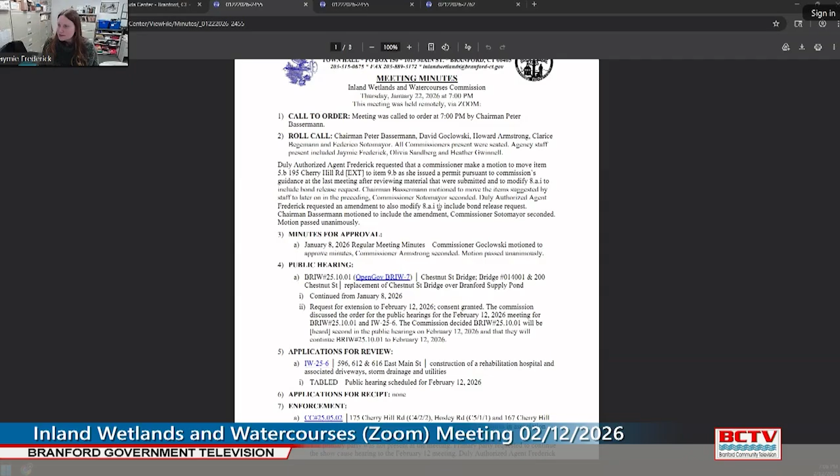Commissioner Bassermann: The minutes we're looking at are from January 22nd, and I have a copy of a memorandum dated the 22nd regarding that bond issue. So these are the filed minutes. I'm not sure if the version sent to the commissioners may have been shortened. Commissioner Goclowski: My minutes show the memorandum on the 2nd or 3rd page. Commissioner Hegemann: I didn't scroll down far enough. Okay, I see it now.

Commissioner Bassermann: Commissioner Hegemann, was there 2 parts to the issue? My other question is about amending the vote. If that's correct language, fine, but it sounded weird to me. I thought when we talked about it, it was an addendum, not an amendment. I didn't know if there was a procedure that if you vote on something in one meeting and then have something added to it, whether the same commissioners have to vote on it, or whether you just need a quorum. I just wanted to bring that up because I don't know the process.

Very good question. We can look into it and bring it back if the motion wants to be withdrawn, or if everyone's comfortable, we can look into it for the future.

Commissioner Goclowski: We can actually approve the minutes minus that particular item until we have a chance to look into it. We have a lot of stuff to go through tonight, and this is a very small item to be concerned with.

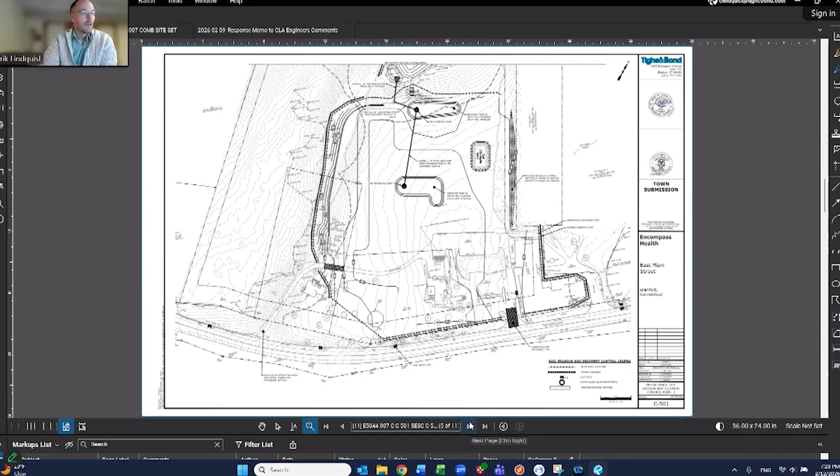There was a request from the third-party review engineer to add water bars here, which we agreed to, and those will be added in the following plan set. We would also provide locations for sediment traps to collect sediment from the flatter area we have to excavate and maintain until building starts. Those will help alleviate excess sediment from reaching the retention pond. This will be further elaborated on in the revised sets.

One comment from peer review was about how the pond would be phased and constructed. They raised good questions that we're incorporating into the plan. Essentially, we'll have two storage piles back here as part of the erosion control plan. One will be for spoils from the pond as we remove material—the lower layers pulled out to achieve the appropriate pond volume—staged in one area so they can dry and potentially be reused on site.

There will be another pile for invasive species, staged on the side to dry out before being removed from the site and taken to a landfill. We have further erosion controls back here as well. There were questions about how this area will be dewatered—there will be a series of hay bale checks coming down the hill, which will also be added to this plan.

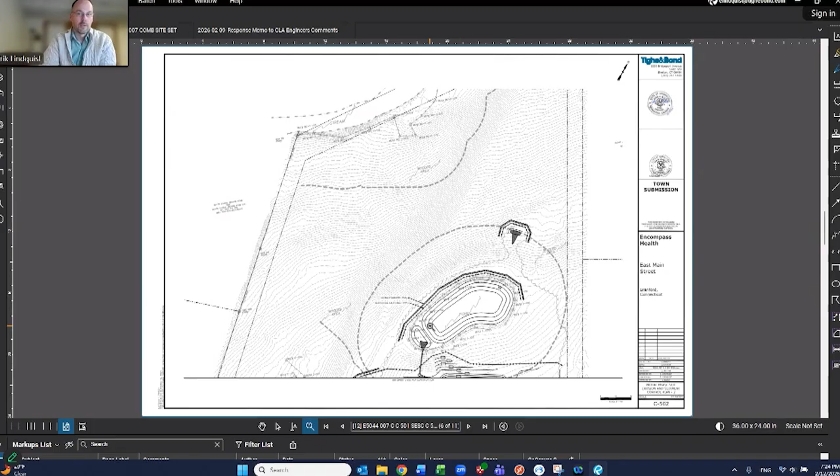The pond will be pumped out in this location. The idea is to have this work done as early as possible, with the pond stabilized before we start discharging flow from the site into it, so that it's functioning and operating at the effectiveness we're looking for.

Moving forward, these are the details for the erosion control—we don't need to go through all of these. This is more detailing showing a section through the pond in both directions to illustrate what's being done. The existing pond is arbitrarily shown here; we don't have the bottom of the pond yet, so it's just sketched in with a dash, but it could go a bit deeper than shown. This is also a bit exaggerated to emphasize what's going on there.

So it's not as big an excavation as it appears here based on the exaggerated scaling.

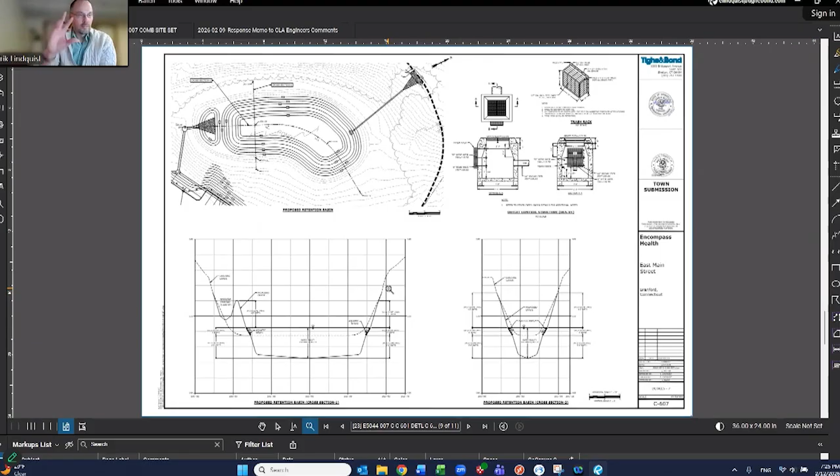As I go forward, this is the planting plan. As you can see, it's a very robust planting plan. The red trees are the ones out in front that will be removed as part of the sightline requirements to meet the state requirements for visibility of the roadways and driveways.

But there'll be a series of perimeter plantings, baseline foundation plantings around the building. The area where we're demoing the building will be grass mostly with some trees to help provide a nice buffer. There'll be various landscape buffers along the property lines to the neighbors. We're trying to maintain the tree lines on all the other sides and provide some plantings at the base of the wall.

We're going to probably beef up the plantings in close proximity to the wetlands. That was another comment that came from the third-party review, as well as the town review, about the proximity of the wetlands and just trying to do things to help protect that close range of construction activities.

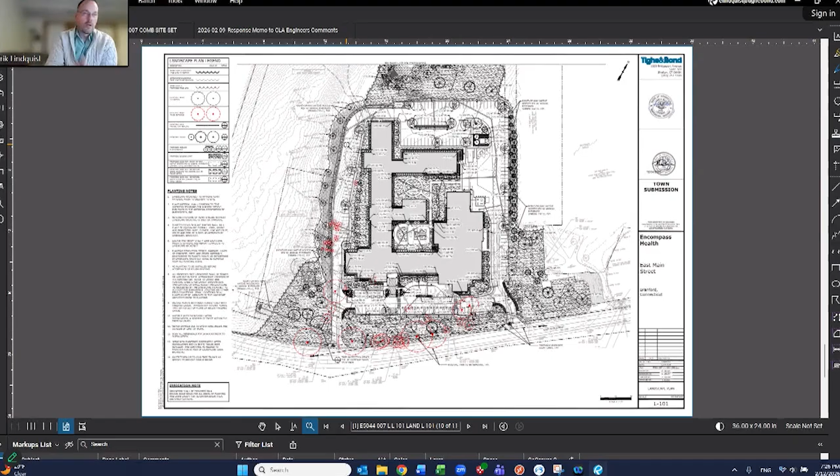But there will be a retaining wall here, which will help protect against any degradation to the wetlands, because retaining walls are excellent for preventing erosion down the hillsides. They kind of act as a barrier wall. So the placement of this wall is actually in a great location for helping prevent and protect that wetlands.

As noted before, there will be a series of wetland plantings and enhancements to the wetland to make this a more functioning and aesthetic wetland. Those are shown here, and those have also been reviewed by the third-party engineer. So that's essentially the layout of the site and what we're proposing out here.

I'd be more than happy to answer any questions or go through the memo from CLA Engineers. But I'm more than happy to pass it along to you, John, if you want to take it from there.

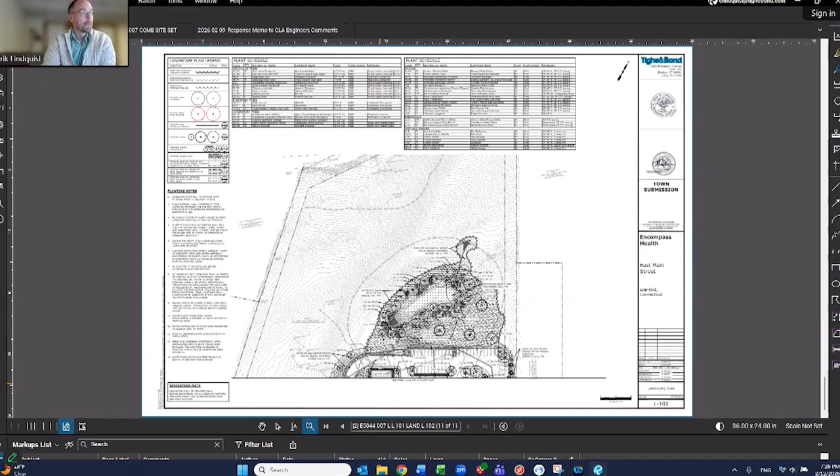Thanks, Erik. So I think we're doing pretty well, Mr. Chairman, we're only at 7:27. So if you want to go to commission questions or the peer review, then we can continue on. Yeah, I guess it would make sense, since some of the peer review items have been addressed by Mr. Lindquist's comments, maybe we go to the peer review, and then the commission can have both of the material that was reviewed to comment on.

So why don't we turn to the peer review folk and see what their comments are at this point.

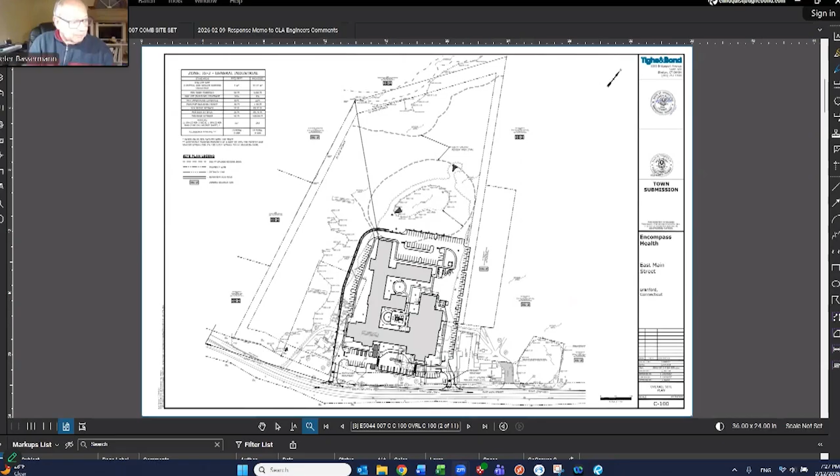Sure, I can start off. Kyle Hobbert from CLA Engineers. We're located... can you turn up your volume a little bit? Oh, sure.

How is that? Better. Oh yeah, good. Okay, good. Again, Kyle Hobbert from CLA Engineers, located at 317 Main Street in Norwich. I'm a professional engineer with the company. I did the engineering review for this project for the third-party review. And with me tonight is Bob Russo from our office. He's a certified soil scientist, and he reviewed those aspects of the project.

Bob and I both walked the site on January 23rd, prior to the heavy snowfall, thankfully. And we also reviewed all of the application documents, the plans and the reports that were submitted as part of the application. It was a very thorough set of documents and reports and plans that were provided.

We then went through the documents and provided a series of about 26 comments to the plans and to the reports. We have subsequently met remotely with the applicant's team, and they had provided a response letter noting how they would plan to address the comments in our letter. I think their plan to address the comments from our letter is appropriate, and when incorporated into a plan set, would be in good shape.

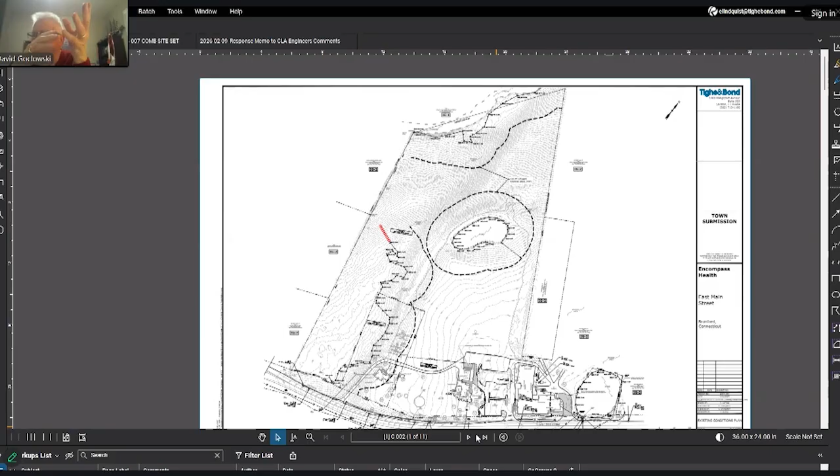This is Commissioner Goclowski, and I'm not sure who can answer this question. You're going to enhance the current man-made pond, is that correct? Correct. And are you making it deeper, or are you making it wider or bigger? You're not making it wider or bigger, you're just enhancing what is currently already there.

Yes, what we're doing for the pond is the limits of the grading. So this is the berm of the pond, and if I zoom in it's a little clearer. This right here is essentially where the wetland line is, essentially the berm of the pond. This is where it's flat and you can walk around it for maintenance, and this is the grassed area as you walk out the site. None of that from the berm in is where this work is being done.

Essentially we're going to be carving out this pond to provide the DOT, or DEEP required wet pond parameters. You need 1-on-3 slopes with a 1-on-6 vegetated shelf at the water surface line, and then it goes 1-on-3 again. In order to meet those requirements laid out in the stormwater quality manual, that's what the grading has been done. That results in, you also have to have about a 4.5-foot standing water surface elevation, which discourages things like phragmites. So it needs a certain depth. All those parameters are what have kind of built this, as well as the water quality volume.

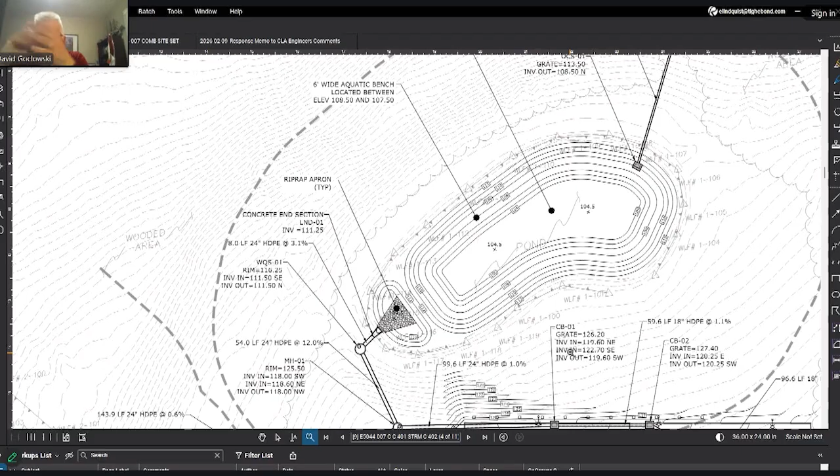At the end of the day, there will be a little extra excavation out of the bottom of the pond likely. I don't know the exact bottom depth of the pond, we didn't go out there with a pole and measure it, but my expectation is that it will be cutting out a couple of feet. That will take it down a little deeper, but the perimeter of the pond, none of that will change. It's simply reshaping the interior of the pond. So the point is you're trying to make the pond better than it currently is. Correct. Okay, thank you.

This is Commissioner Bassermann. What's the source of the water currently in the pond? Is it stormwater and groundwater, what supplies the pond today? The primary source, and I could share this, I didn't show this before, but this is the watershed for the area, the existing watershed. You can see EXWS1B is the area that drains to the pond currently, so that is the primary source of water. There may be some groundwater overland flow that comes because this is a naturally occurring hill, and I could let Matt speak further on this if you'd like. But basically those are the two potential sources of water, the primary source being this overland flow to the pond.

One of our concerns, which we laid out in our alternatives analysis, is that in the proposed condition, the watershed for this pond now is significantly smaller. That's one of the reasons it also behooves us to maintain water flow to it, because this development does cut into that watershed area significantly.

And a different question for Commissioner Bassermann - I believe you said there was no hydrological connection from that pond to anywhere. Is that also true of wetland number 3 and the pond there? It's self-contained. It doesn't go anywhere.

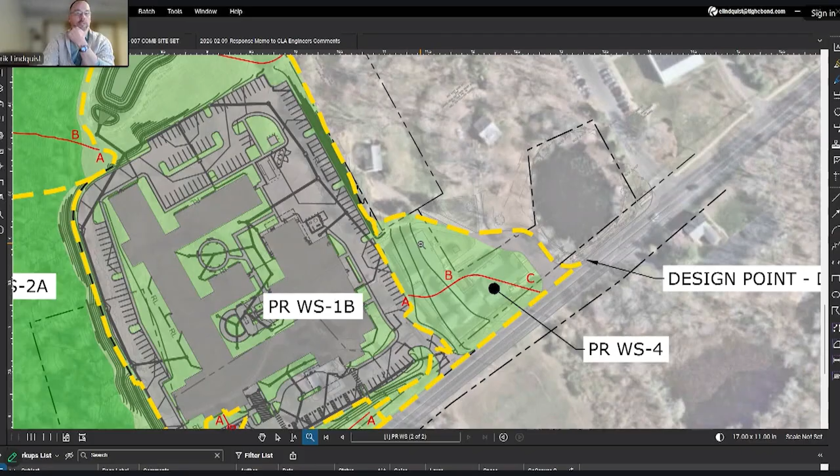So from the wetlands, you're going to have an existing roadway to remain as driveway - that's your immediate connection that won't be touched. Everything to the southwest of that will be demolished and enhanced by plantings and grass and things of that nature. Thank you. And that red line, BC - I couldn't read the legend.

That's a time of concentration path. Essentially, it's the hydrologically furthest point away. When measuring flows for a watershed, you need to understand how long it takes for a drop of water that lands at the hydrologically most remote point to make its way through - that's how you calculate flow for a watershed. So that's just showing the longest path of water that falls in that watershed, and that's how we determine flows.

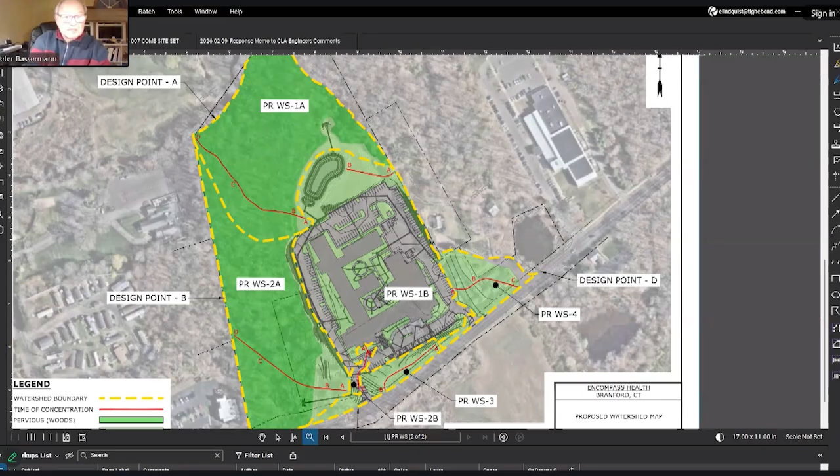Thank you. I guess at this point, it's commission time.

This is Commissioner Hegemann, I had two questions. There was mention of a 4-foot high metal fence with vinyl mesh. Is that a temporary fence around the pond, the big pond in the back?

No, that was a request, and it's something we typically show. You should have a safety fence around a pond so children don't come up to it, or anyone goes into it or trips into it - it's a hazard, so fences are added for that. One way to address that is we chose a black vinyl mesh chain link fence that's 4 feet tall. I personally prefer black vinyl because from a distance you don't even see it - it blends into the background. I think those are aesthetically the best looking, but people have used split rail fences which I don't think work as well for safety, even though they're more natural looking. I don't think they provide the safety measure they're intended to provide, so I don't prefer recommending them.

Commissioner Hegemann asked, so does that change the value of the wetland? Because it's going to be a barrier to critters that crawl to go to that area?

Matt, I could let you speak on that in terms of chain link fence. It depends on if the chain link fence will be wildlife friendly. Sometimes these types of fences meant to keep humans out can have a gap in the bottom that would let certain species pass through. So if that's something the commission requests, Erik, you could speak to whether that could be included in the design.

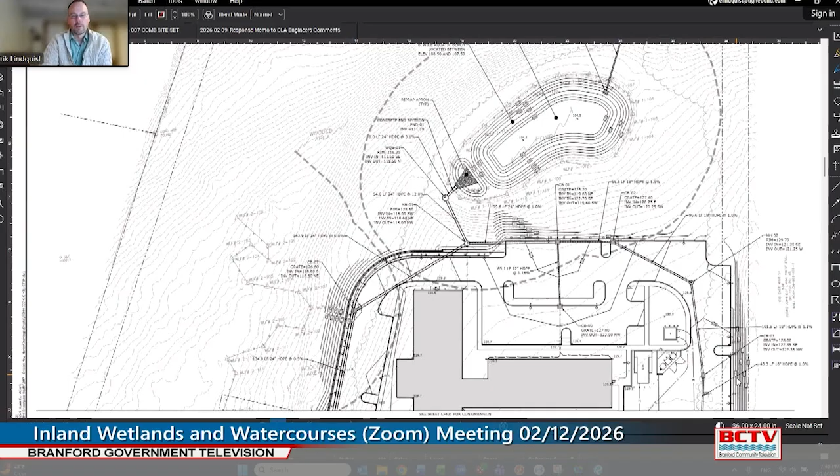Thank you. This is Commissioner Bassermann. What's the, I guess, construction time from shoveling the ground to occupancy?

I wish I was better with numbers and timeframes, I don't recall off the top of my head. I believe it's about a 12-month or a 15-month construction schedule, if I'm not mistaken. John, if you have it handy, that'd be great, but I don't have it in front of me, though I can get that number for you.

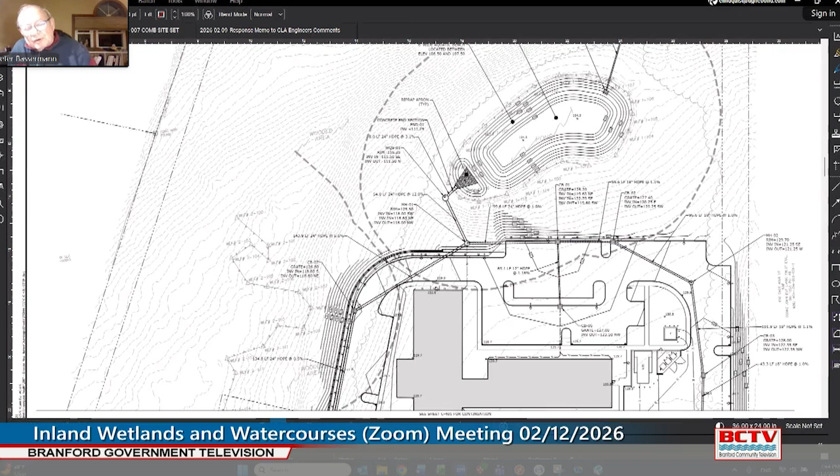I guess the concern is, as the site progresses, the stormwater management controls - how are we protecting the site as it goes through its various phases of construction if the management controls that are put in at its inception aren't the right ones as the construction progresses?

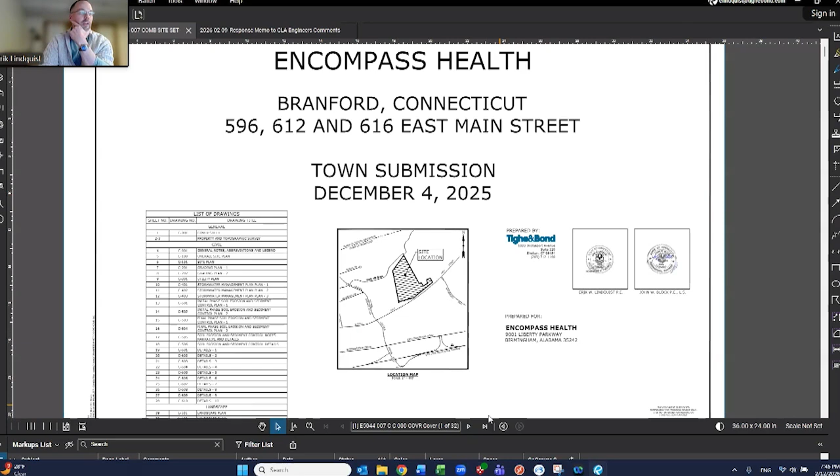Well, we do have a phased erosion control plan. I'll share the full set of drawings I have, and I can go through this really quickly. There's a construction sequence included in there, so we can never capture every possible scenario of stages of construction or what have you out there.

As I go through this, I showed you before the initial phase. This is even further along than probably a really initial phase where they'd set up a staging area and start to do some earthwork in this area. But basically this is the initial phase, and then there's also a final phase plan, which shows a more end-stage scenario where we're still having the erosion control perimeter set up, the wall's been built, there's inlet protection and things of that nature.

There are notes included as well calling for the contractor to amend things as needed. There'll be inspections done throughout the process as part of the Connecticut General Permit process. So as things are seen in the field, there'll be repairs requested, edits requested, just making sure everything's maintained and protected throughout the entire construction sequence.

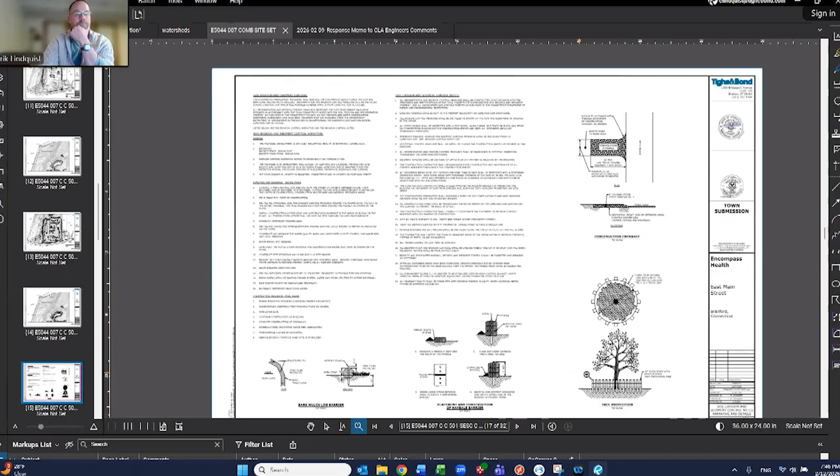Commissioner Bessermann: I thought when you made your comments regarding the pond that the work on the existing pond, Wetland 1, would be done in its early stage. Correct, that's the intent, to have this done initially, before we start discharging flow to it. We're going to want to do this correction, get the plantings in, stabilize the slope, and have this outlet control in place. That's one of the first things we want done initially, and then more significant earthwork and storm drainage could be done afterwards and start discharging to the pond.

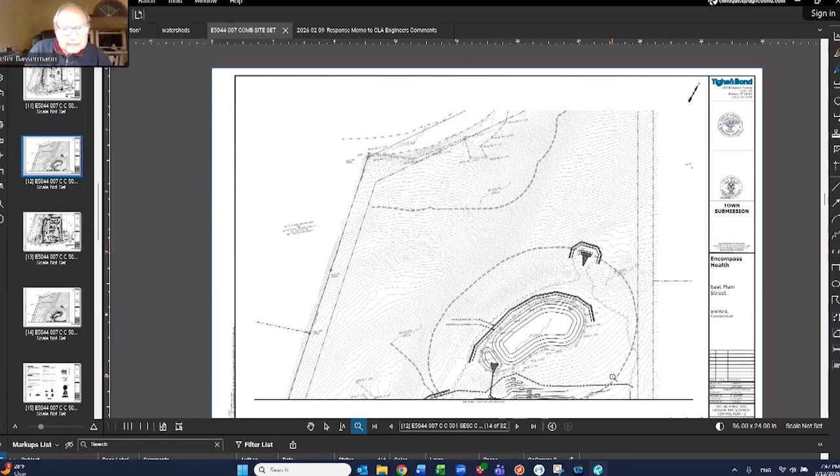And do you have a handy memory on what the construction sequence designation is on your plans? I'm not sure I understand the question. The sheet number for the construction sequence. Right here, it's C505. Thank you.

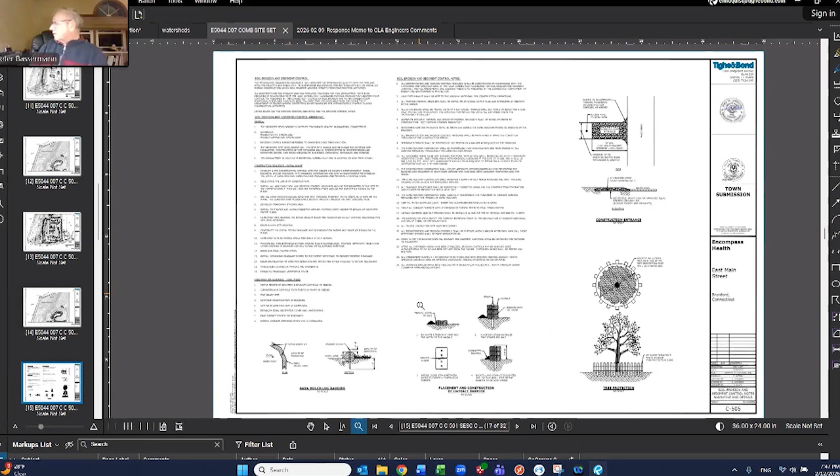Commissioner Bolla: Earlier, Mr. Lindquist, you had mentioned the sediment traps in the section closer to Route 1. Can you go back and review, is there multiple on site? Where's that sediment getting trapped before going to the pond?

The idea of the sediment trap is when you have large areas of clearing, especially when excavated for a foundation, you'll have a lot of exposed earth that's not stabilized, no grasses on it. During construction, the mud will get moved around. So once you get a certain size area, about an acre to a half acre, you want to look at sediment traps and basins to provide places for the water to go and settle out sediment. That's what these basins are designed for.

Essentially, in this area, this whole section is designed to go to this sediment trap right here, and then the back area will go to this other sediment trap, so that this water is clean before it goes into these pipes and out to the pond. In the revised set of plans you'll get, there's a detail for this.

There's a dewatering sump, I'll call it, essentially a riser pipe with perforations and stone around it. The dirty water comes into it, and the crushed stone as well as the filter sock around the perforated pipe will filter the water out, so clean water goes into the pipe and out to the pond. The pond itself acts as a settling area, so as the water sits there the sediment settles out, keeping that material on site so clean water goes out to the back. That's essentially what those basins are for.

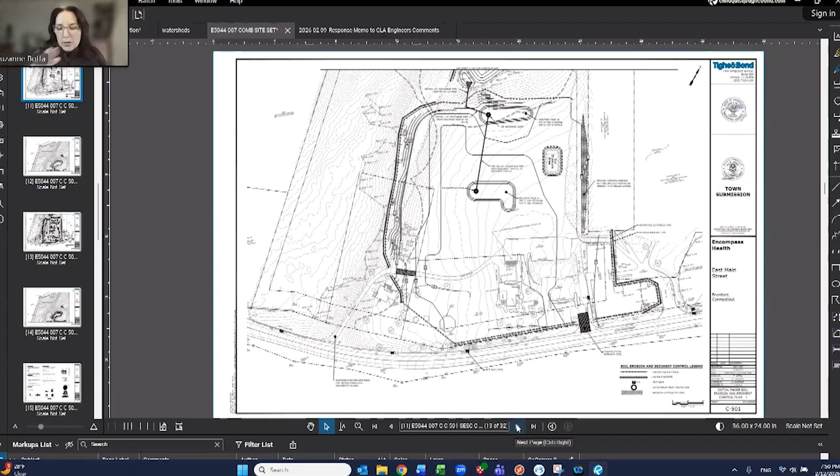Okay, thank you. And post-construction, can you walk through in a little more detail the treatment train for all of the site, including the roof runoff and any different sections of the property?

Sure. So basically the entire site, the building perimeter will have a bunch of roof leaders that come down and are collected around the building. I can zoom in and show this. It's largely going to be the roof leader lines connecting at various places in the buildings. There's area drains in the grassed areas, catch basins in the parking lot. All these things come together and they're collected. Each of these will have sumps on them, which will help add further sediment collection within the catch basins.

The pre-treatment, as discussed before, in this case over here, we have an inlet water quality structure, so this will have that pre-treatment before it discharges. This one doesn't have a pond or any retention, other than the minimal amount in this level spreader. But we've overcompensated for that in the rear pond because we don't have the ability to do it out front. So these large areas will go out to the back.

As noted before, there's a water quality structure here. That's the pre-treatment. The sediment forebay is also pre-treatment that allows sediment to come out into the pond beforehand. And then there's the water quality line within the pond, which provides a cooling factor. It provides a way for the water to settle out sediments once the site is stabilized. So this falls under the wet pond of the Connecticut DEEP water quality requirements, and the outlet control maintains that. And then once again, we have a level spreader out back.

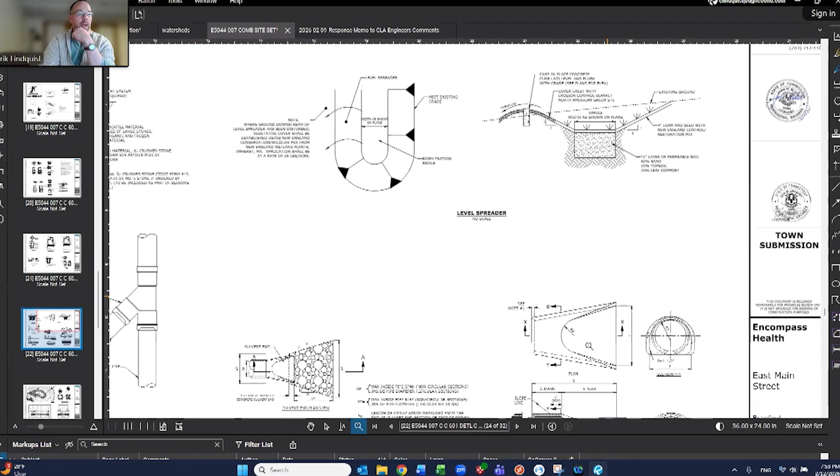Yeah, so let me show you the detail for the level spreader just to give you an idea of what that is. Basically, it doesn't show the outlet, but there'll be an outlet like this that comes out of that discharge. This, like I said, is modified riprap, so it provides energy dissipation through the rock. These are large, 12-inch stones. They'll come down the hillside, and they'll go into this area where the water will pool a little bit and build up about a foot before it goes over the level spreader, which we propose as a concrete cast-in-place curb that allows it to be laid level and flush to make sure you have an even level spread, which will go down the hill.

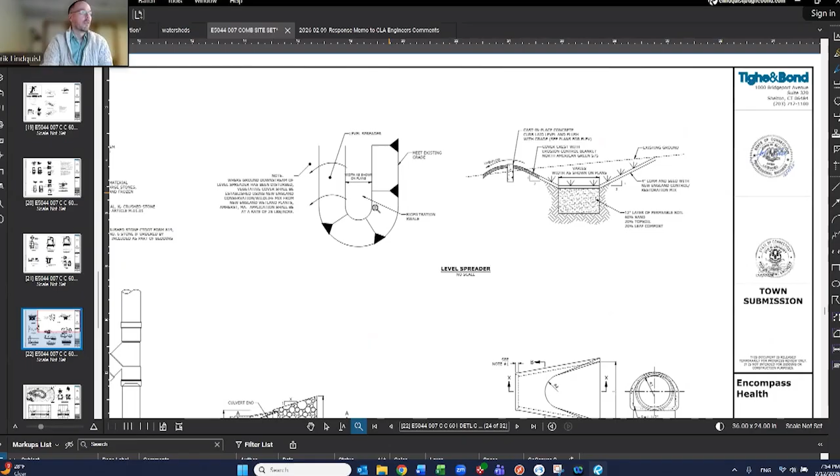And then in terms of plantings, I can go to - wrong one. We have this, and one of the things I've asked my landscape architect to do, and part of one of the comments, was to lengthen this level spreader to take up more of this area to provide that level spread. We're also going to rotate this a little better to align with the contours. And I've asked my landscape architect to look at potential decorative grasses and things of that nature that could help further enhance this discharge as well. So all three of those items will be incorporated into the next set when we resubmit.

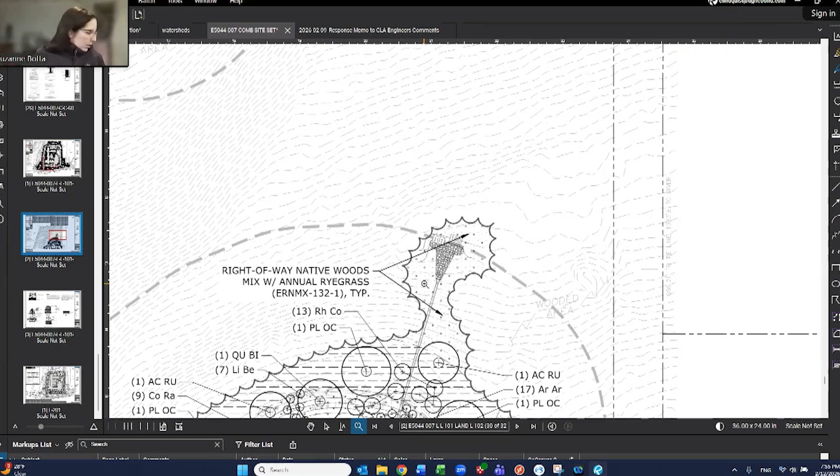This is Commissioner Bolla. Is there plans, speaking of all the snow that we've had, for snow stockpiling areas?

Yeah, so I can go back to this, might be the best plan to discuss it. So there are a few areas which we have to provide it. And maybe the grading plan might show it a little better. If I go to that set, that might be even better to show some of this.

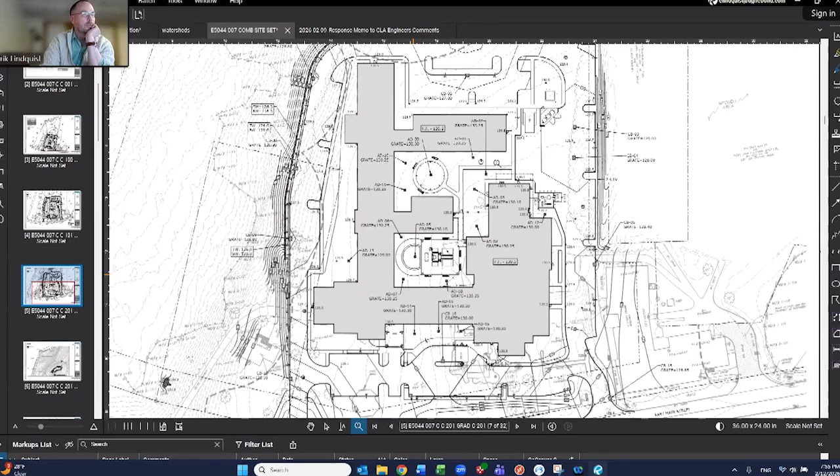So especially in this area, when we put that wall in here, it's going to get a little flatter. This area along the backside of the curb will be one area where we have like a 3 or 4 foot shelf to put snow. The entire back area here on this side will be able to have a shelf for snow as well. Along this side of the building, there's a considerable amount of grassed area that can be provided for a shelf of snow.

As well as along the frontage of the roadway in this area. We wouldn't want to put it towards the building, but along this frontage of the street, where we have a little bit of a knob here that will hide it, and not necessarily huge piles because there's not much pavement in front. But we see this being an area back here that we could put snow as well, so it's along the perimeters of the site. We wouldn't put anything on the high side of the wall over here on the wetland side, obviously. But we're trying to put it in places that make sense, where we have landscaped areas that don't have high congested plantings.

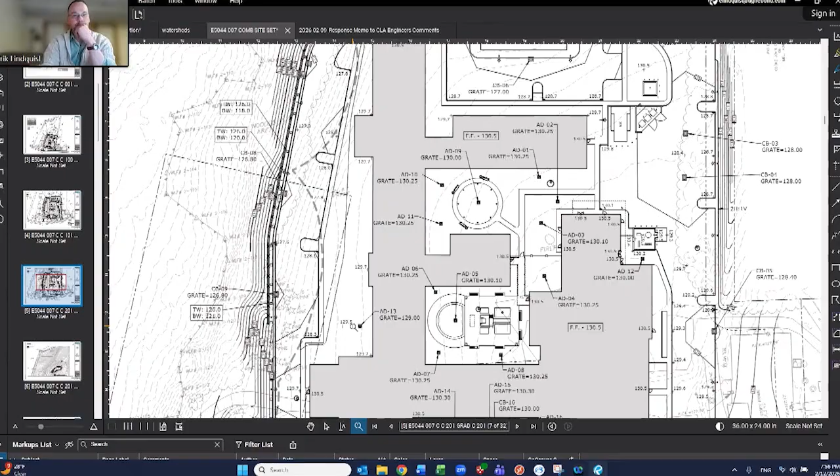Again, this is Commissioner Boda. Can you just point out where any stockpiling would be? I know you talked a little bit about pulling the material out from the pond itself, but what about the remainder of the site?

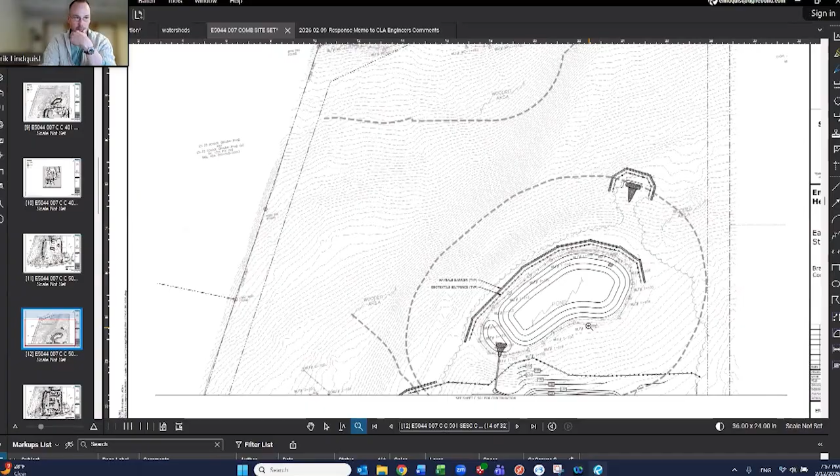Yeah, so those two stockpiles I mentioned, when we send the revised set of plans, will be located in this area, roughly right here, just in the grass area to the south of the pond. In the other phases, this is just our best guess — obviously a contractor is going to have a better understanding of where it makes sense to put these piles. I don't see a concern wherever these are located throughout this area of the site. I prefer putting them towards the back, but not so far back that it's close to the ponds or anything like that, but something centrally located, convenient to where the work's being done.

I think this is a good spot, away from the walls, but close enough that it could be utilized wherever. But if this location gets bigger or moves around, I'm not overly concerned with it — it could likely go anywhere in this whole area back here.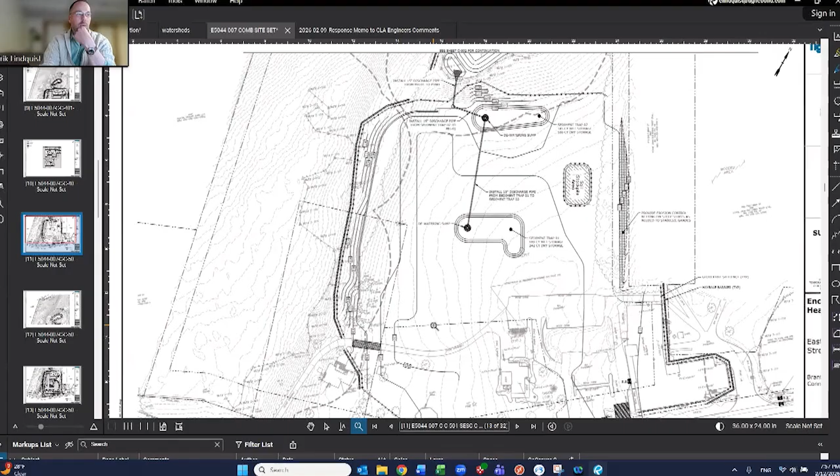Okay, and it's just the one? As of now, but if they wanted to do two, I wouldn't want to put a restriction on that per se, because I don't know how much material is going to be generated at any one time and how they're going to place it when they put the walls in. That's really a means and methods issue for the contractor, but this is just a general guide to give them instruction on what we think would be a wise way to do it.

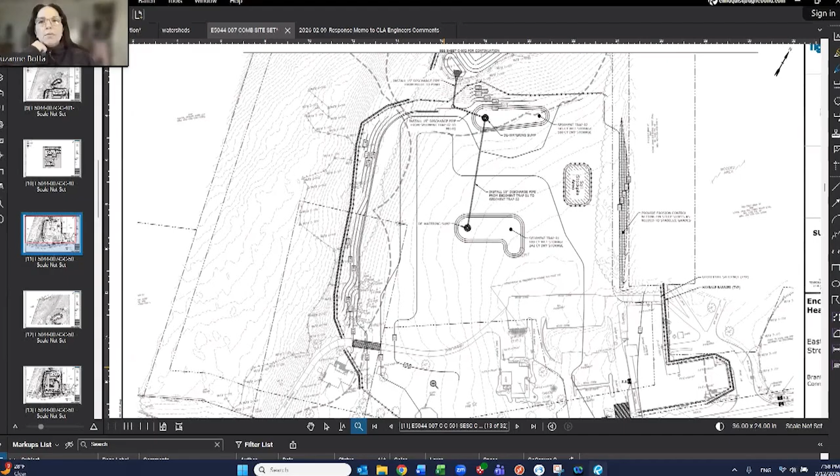Amy Frederick, the Wetland Agent. I do have a follow-up question off of that. In regards to the fact that there's some redevelopment, the asphalt material on site — will that be stored on site for reuse, or is that intended to be taken off site, or is it not known at this time?

You're talking about the existing parking lots? Yeah, I'm not sure what would be done with that material. I'm guessing it will be hauled off. I'm not sure if there's any way of mixing that with native material on site and using it as general fill. There's not a lot of it, so I'm guessing it would be removed, but I don't have a definitive answer on that at this point.

That might be something the commission would look for clarity on.

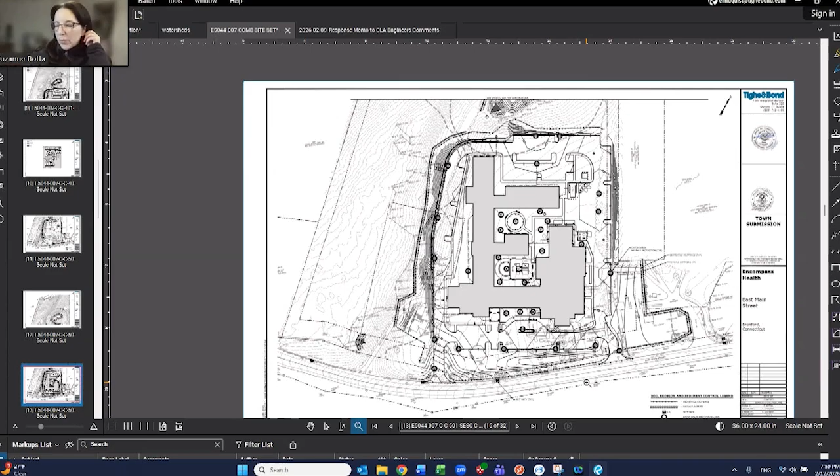Yeah, this is Commissioner Bolla. I would second that, and I would just be concerned about any of that being placed on the...

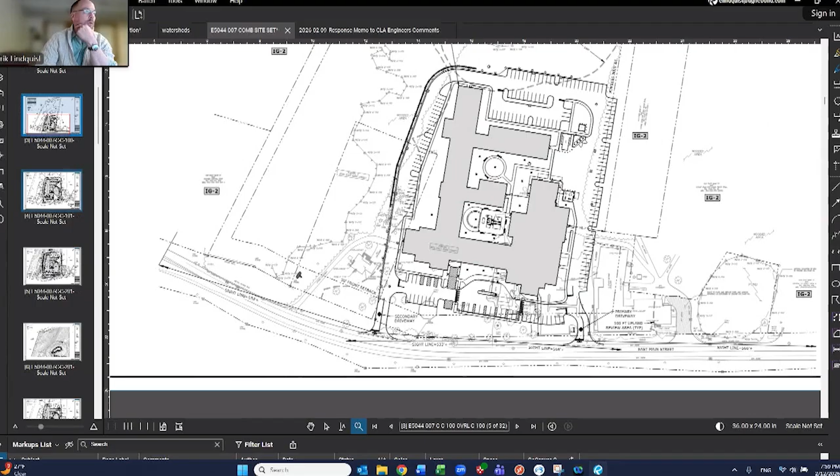On the western side near Wetland 2, that material definitely wouldn't be used here because this needs to be a certain select fill material for the retaining wall behind the wall, so that would not be used in that area. My guess is it would be removed from the site. If I'm not mistaken, this isn't really the greatest material, there's not a lot of it, and it's probably pretty thin as well. I wouldn't imagine it's like a 4-foot pavement section or anything like that. My guess is they probably stockpile it and then remove it from the site.

Commissioner Godowski, predominantly the driveway, it's gravel at this time, isn't it? Yeah, I think there's a mix of gravel and pavement, correct? Okay, but most of the pavement is on the side. I got to get my bearings right, on where the original Hilltop building was - that's where most of the pavement is. I think it's in this area as well, if I'm not mistaken. I don't recall off the top of my head, but I believe this parking lot here is, and this might be gravel in the back. Yeah, I believe it's all gravel back there.

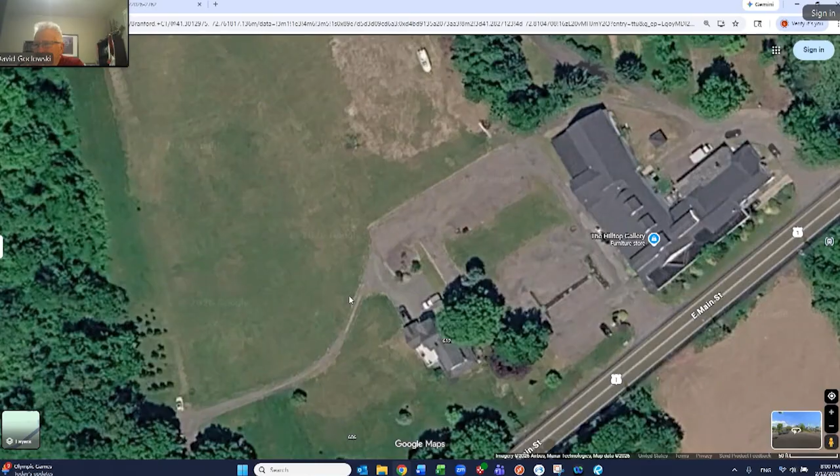This is Commissioner Begemann. I just remember that when we did the site walk, walking up the driveway, I don't remember seeing any pavement. The only pavement I remember is closer to where the actual Hilltop Gallery building was, and that area there was pavement. I don't remember the other part of the driveway having any additional pavement around the houses themselves. Right, I think you're correct.

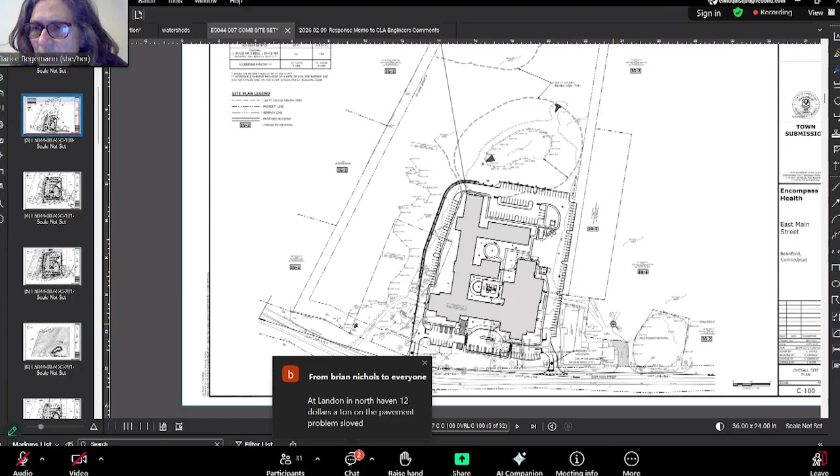Commissioner Begemann, this is a different topic. Do we know if there are any underground oil or gasoline tanks on the old property? And kind of new for me - when there's a big demolition happening, what goes into checking the land for toxic substances? I believe there was already a phase 1 done. It wasn't done by us, but I can track it down. I believe there was a phase 1 already done for the site, and those things were identified. I don't think there's anything of concern on site related to that, to my understanding.

Thank you. Mr. Basserman, when you send in the revised plans, is it possible to have a sheet or a section of a sheet that would list the various inspection timeframes? Not so much the clock time, but after what activities would there be an inspection?

That's in the engineering report, and it's part of the maintenance plan, so it's not spread amongst the various sheets - it's on one sheet, in the report. There'll be an actual maintenance plan, and that maintenance plan will be included with our general permit, kept at the construction trailer for the contractor. He has to maintain it on site during construction. Basically it lays out the post-construction maintenance plan, but there's also maintenance during construction as well. So that would all be part of the contract documents for what's being done out there.

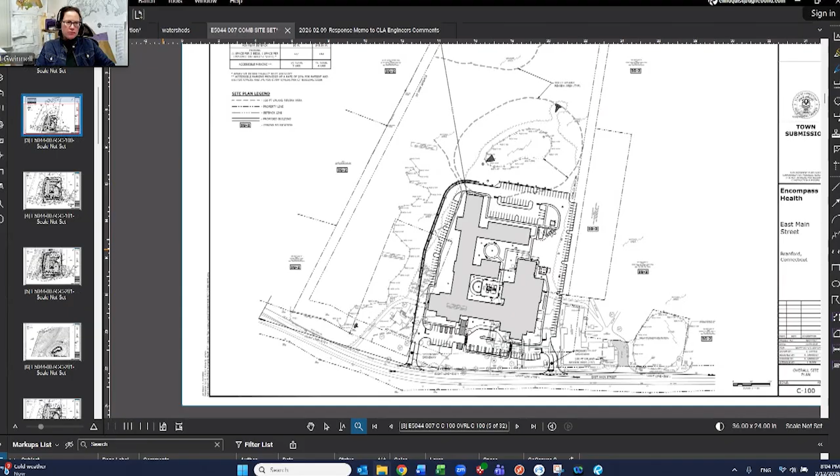This is Heather Gwinnell, Wetlands Officer. Commissioner Basserman, are you asking about at what stage in the construction process, or are you talking about a list of the items that get checked at each inspection?

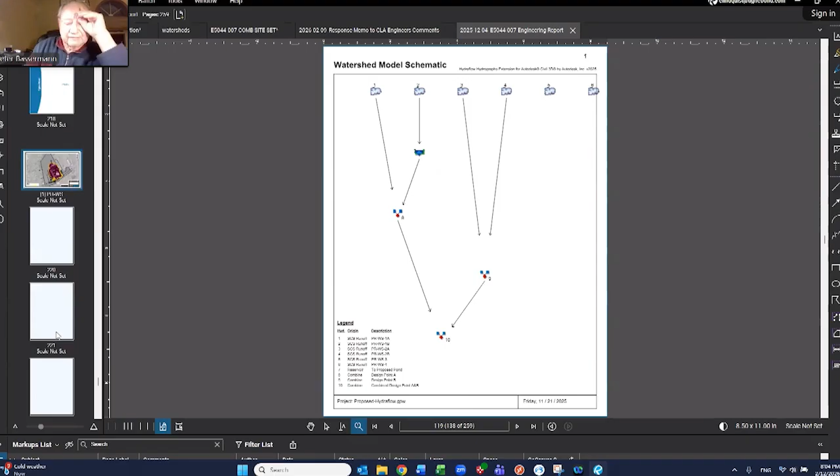I know that obviously as the different activities occur, there's an opportunity for inspections to make sure that there isn't anything that as a result of the construction gives us concern. So if there were identifying activities that said, once we've completed the wall...

All right, oh, you're talking about that. Okay, yeah, all right. This is post development maintenance here, so this isn't what you're talking about, but there, as part of the general permit, we haven't done a SWPPP for this site yet - that's why this is so important.

When I talked about the SWPPP having a maintenance plan, there's actually a DOT or DEP protocol of things we have to have on site, like checking where petroleum is stored and things like that. That's what the general permit is for, because it's for construction and dewatering wastewaters from construction activities. The whole point is to make sure things are being protected properly. It tells you after a rain event of such and such intensity, you have to go out and inspect the site. It lays out all those things, and the contractor is required to follow the general permit, which is made part of the contract documents. So they'll know they have to be out there after every rain event checking all their erosion control measures, and they'll have a third-party inspector come make sure they're operating properly. So all that is part of the general permit.

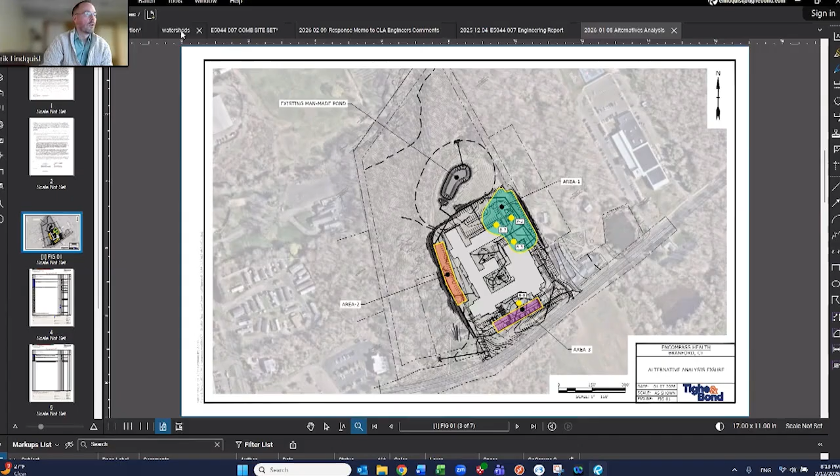I showed the watersheds before, where we're trying to maintain the same drainage patterns for existing and proposed conditions. You can see there's a discharge that goes out to the river, an existing discharge that comes out here and ultimately reaches the river. There's also a watershed that goes out to Route 1. For all these locations and watersheds, our engineering report documents that in each storm event from the 2-year to the 100-year, we're matching peak flows. But there is a slight increase in volume from the pond due to the fact it's not infiltrating groundwater.

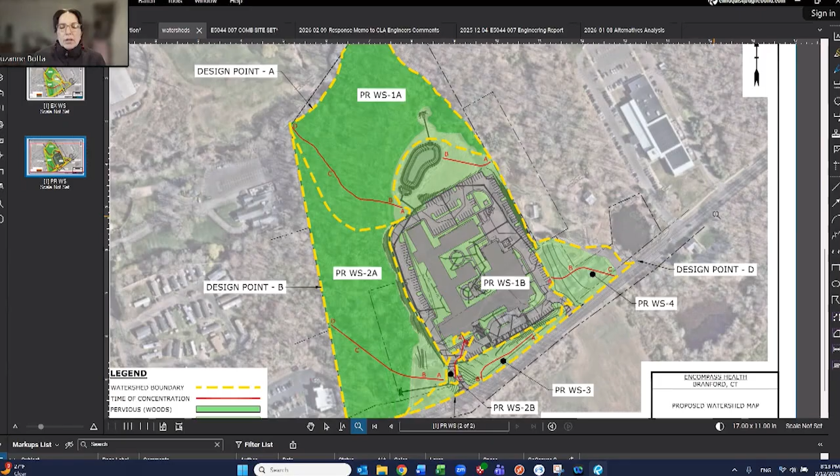Mr. Lindquist, this is Commissioner Bolla. While we're looking at this watershed image, I can't see the bottom of the key at the moment, and I was a little confused about why. So if I look at this, watershed 1B, and then where you have the discharge with the level spreader - this up here - it looks like that is still in that lower watershed as opposed to being in what looks like watershed 1A. I'm confused because it looks like everything the level spreader is downhill, so my brain can't make sense of this image.

No, I've been doing this for 20 something years, so it's second nature to me. Trust me, I get it, these things can get confusing. So everything in 1B is what's going to the pond. This yellow line shows all the area from the building, the parking areas, everything going to the pond. The level spreader is what's, essentially once it goes to the pond, it then goes to 1A. So that's why it's 1A and 1B - they're essentially watershed 1, we're just showing what goes to the pond and what goes to the river. The coloration is just ground cover - gray is impervious pavements, light green is grasses, dark green is woods. That makes more sense.

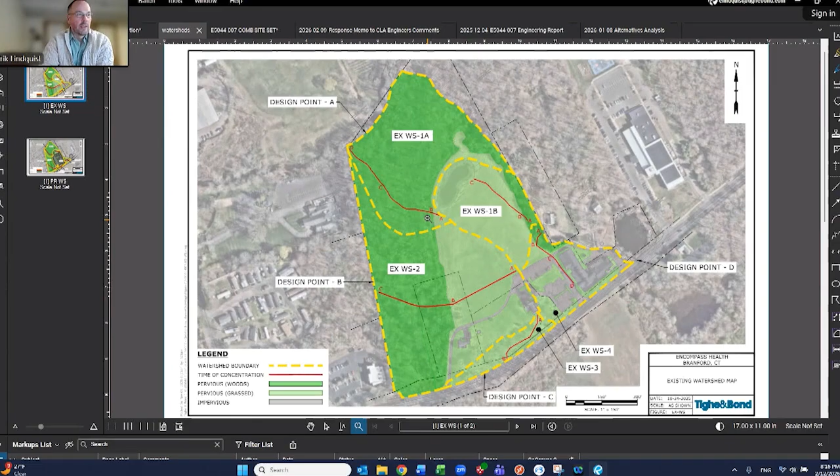You can see the area going to the pond currently isn't that significant - it's this area here, 1B. In the proposed, we're taking some of watershed 2, a little bit of 1A, some of watershed 4, some of watershed 3. So a lot more area is going to the pond now. There'll be an increase in the amount of area going to the pond.

So that's why we have the outlet control structure in there to mitigate the flows. We provided more storage to account for the greater volume going to the pond. If we weren't to use this pond, the watershed going to it would only be essentially this area here, and it would be very small - not enough flow to maintain that pond. The pond would eventually dry up because we're cutting off any potential groundwater, which is minimal anyway, since it's largely based on sheet flow, overland flow. So it makes a lot of sense to maintain what we're doing to the pond, provide clean water with the water quality structures and pre-treatment, and have a sustained flow that will support the plant life we want to put into the pond. Okay, thank you very much.

This is Commissioner Papantonis. I have a question about the woods - are they going to be staying woods? There's no plan to turn that into grass or anything. Our goal is to maintain everything out there as much as possible. We like the woods, we like the screening, we like the protection. There will be some woods cleared right here, just because we need it for the footprint of the building. There'll be some clearing out front for sight lines, and some clearing along the side of the property line for parking. But all these dark green areas are woods that are remaining, and we want to keep it that way.

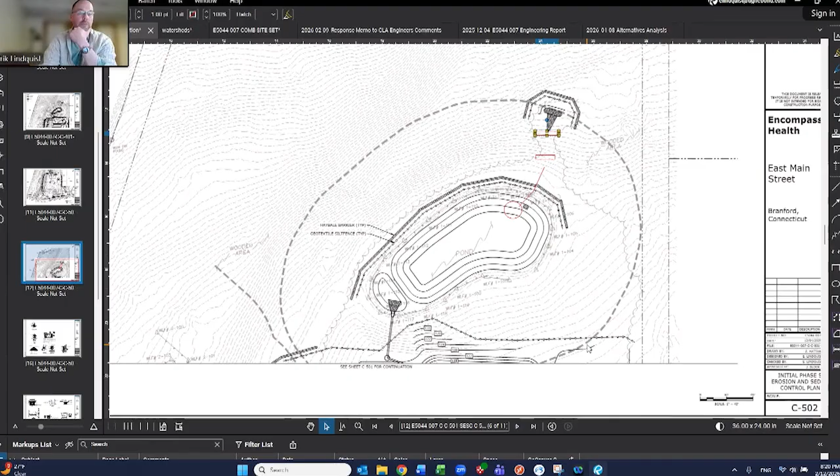And that was discussed with the third-party review engineer, and that was their advice, or part of the discussion and collaboration we had with them and their concerns in their letter that we addressed. Thank you.

This is Commissioner Bolla for Mr. Regan. Can you talk a little bit about the level spreader, and about the downhill soils? Do you know what kind of soil is there, its composition, how sturdy it is? I haven't done an in-depth soil analysis or geotechnical analysis for where the level spreader is, if that's what you're asking me. I would assume that the soils at the location of the level spreader are suitable for that.

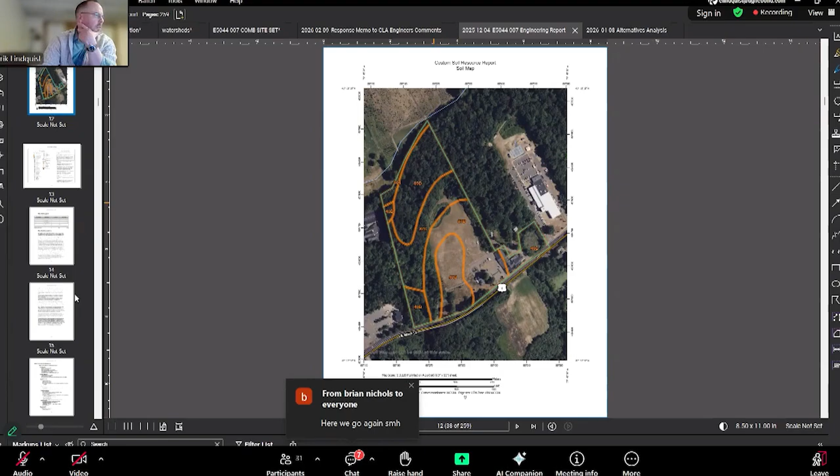Eric, if you could speak to that in regards to the load on the soils. Yeah, so this is just an overall soils map of the area, and it's 87C, so we're talking about a loam on a steeper slope. It's a soil on a steeper slope that's in good shape, not just eroding down the hillside currently. So I don't see any concern with this loamy material being used for a level spreader, especially with the checks we're providing and the controls and detail I showed you of that level spreader. We didn't go out there and do any sampling of the soils, but it appears to be a suitable material on a slope that's not eroding, with no concerns currently.

This is Commissioner Bolla. I think that even on the site walk, that was something that caught my attention. We do have some sections of town, not super far, where the soils are highly mobile. The purpose of the level spreader is to slow the velocity, and the idea of putting additional plantings beyond that is to prevent any initial creation of rills, etc. I think we've seen some pretty significant damage from small amounts of concentrated water.

So if you would, Mr. Regan, just take a look at that soil and let us know a little bit more about it, that would be really helpful.

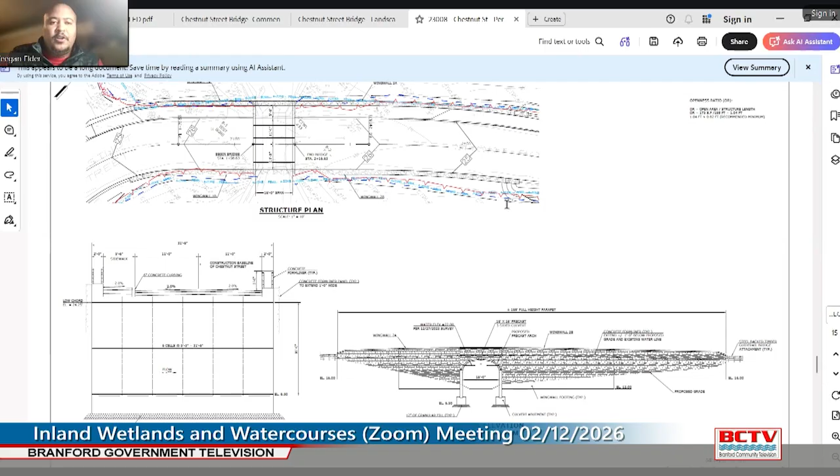Go ahead, Mr. Keegan. Okay, thank you. So this project involves replacing the existing failing structure over Chestnut Street between the Branford supply ponds. On your screen is an overview of the bridge that is going to replace the structure that's there. Roughly a 16-foot span structure, which is wider than the existing structure, creating more watercourse and more habitat in the channel.

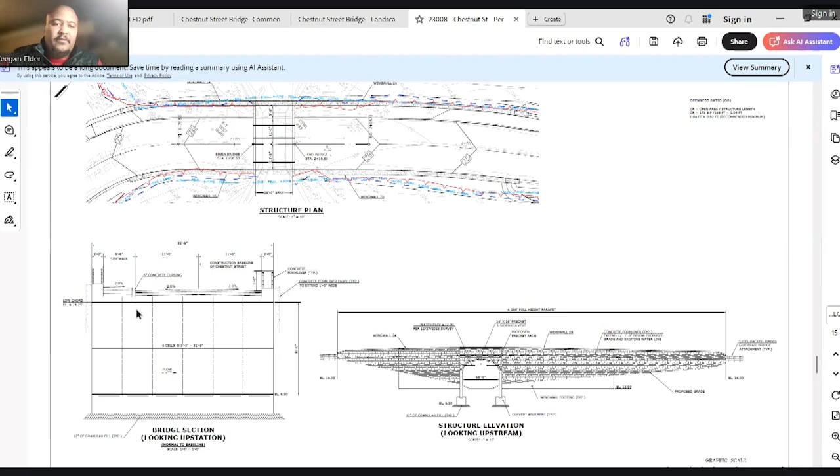In conjunction with the bridge work, there'll be a concrete sidewalk installed on the northerly side of the road, and along both northerly and southerly sides of the road, retaining walls to maintain the roadway safely in that area as well. The road will consist of bituminous concrete pavement. We have concrete parapets and the culvert that the water is going to convey through.

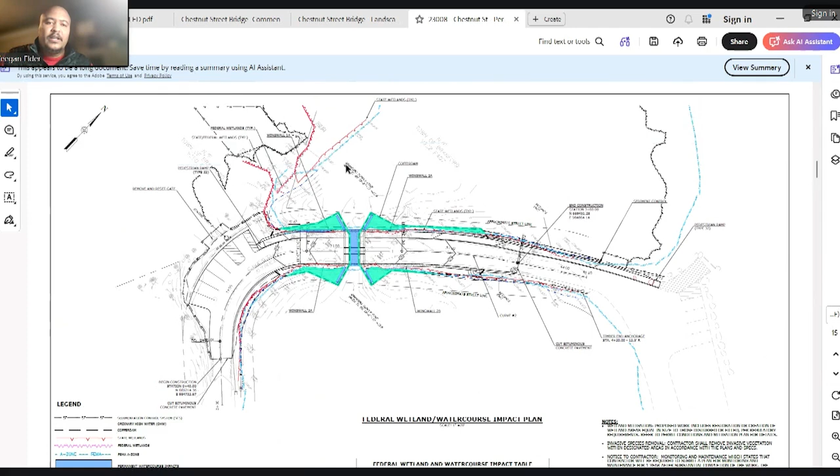For the work and the sequence of the work, we intend to close the road to construction. As part of the bridge work, there will be some roadway reconstruction approaching the bridge from the west and from the east, reconstruction of the driveways. To perform the work, we'll be installing temporary cofferdams and turbidity control curtains to protect the construction area and make sure that we maintain flow and clean flow throughout the project.

This project has been submitted to the DOT and DEEP for their review. Fisheries, NDDB, and Army Corps and DEEP have chimed in. The next step in this process, after local approval, is to submit our final permit to the Army Corps before moving forward to construction. So back to the sequence of work.

Once we get out to the site, the road will be closed to traffic. Construction is anticipated to take roughly 8 months of working time. Given our sort of delayed schedule in getting started this spring, there's a potential that it could start in the summer and go into next summer with some winter shutdown periods involved, depending on how bad the next winter is going to be.

Fisheries notes and comments have been incorporated in the plans, including time of year restrictions for various species and cofferdam types. We have addressed their comments as well.

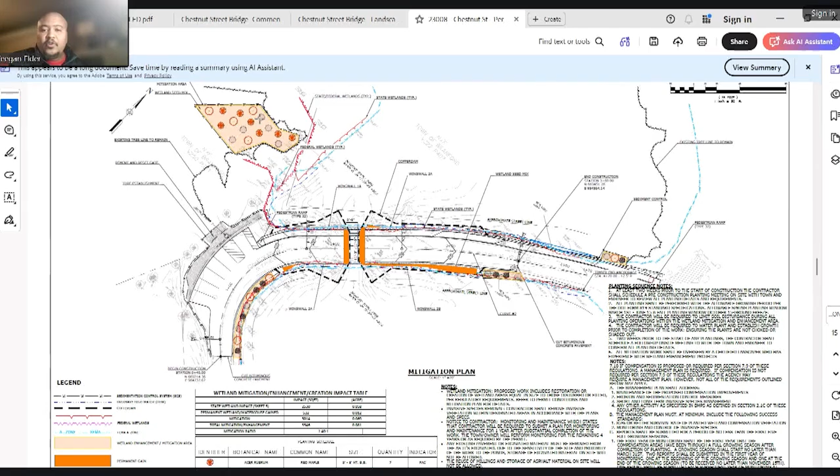Comment number 7 - sorry, I skipped one. Comment number 6, the narrative sequence should be on the site plans. Let's go back to page 3 of the site plans.

We added a sequence of construction. Planting sequence notes are all included in the site plans, going through the steps I started talking about earlier: when work is going to get done, how the work is going to get done, and the timing of most of the construction activities are presented directly on the plans for the commission.

Comment number 8 requested more information on the particulate removal of the turbidity control curtains, and to talk in depth a little bit about the type of material and so forth.

The turbidity control curtain type for this type of project will be a type 3 turbidity control curtain. That curtain is a reinforced fabric material, and it limits sediment infiltration to less than 5 NTUs, that's nephelometric turbidity units. This is a heavy-duty type system designed for activities in rivers and ponds where there is potential for significant flow and movement of water, which is what we have.

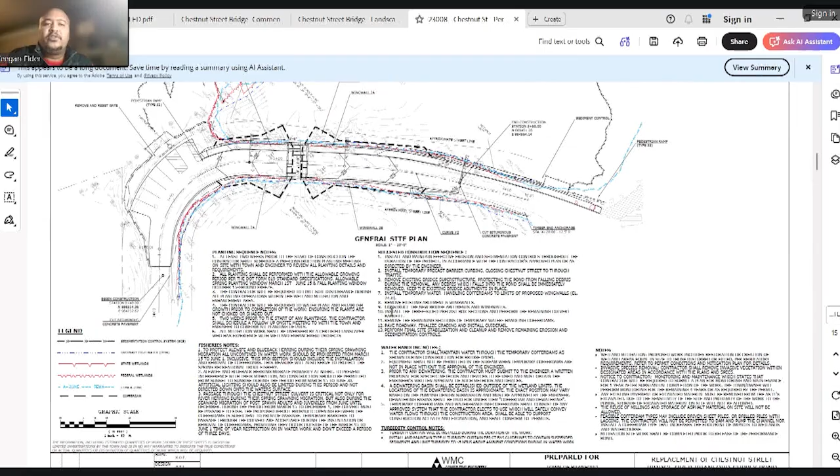Type 1 or type 2 turbidity control curtains are more light duty. This heavy duty curtain is ideal for these conditions, and those curtains were added to the plans as requested.

On sheet 13, we show the turbidity control curtain installation alongside the temporary cofferdams.

Notes for the turbidity control curtain talk about the particulate removal and the duration of the installation, or how long the turbidity control curtains are going to be in place while the work is being done.

Moving on to comment number 9: timing of when mitigation will be completed. When will mitigation occur relative to the rest of the project? That is also answered in the Talcott and Associates letter, number 3 of that letter.

All plantings shall be performed within the allowable growing period. This is also in the plans as well, but was confirmed and substantiated in this letter.

Given durations when planting can occur, invasive species control should take place as soon as the project is mobilized, and these activities could take longer. No planting should take place until invasives are controlled in the replanting areas and preparation is complete. That ties into one of the other questions later on, and we'll expand on that when we get there.

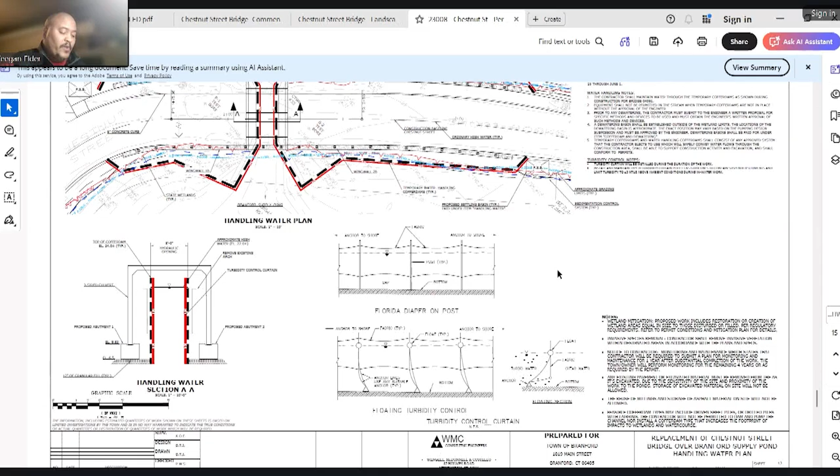We're increasing the waterway opening, installation of wetland seed mix in certain disturbed areas, enhancing the wetlands in the gravel pit area that we talked about. Also plantings along the edge of the road, providing shrubs and small trees where possible along the slopes and the edge of the ponds.

The wetland soil scientist worked with the landscape architect to confirm these locations and finalize these plans that we have. Comment 13, which was received after the meeting.

Will native soils remain, or is the plan to excavate soil through the Phragmites rhizome layer? How much disturbance will there be in this area? The soil scientist recommends we keep disturbance to a minimum, since invasive plants exploit disturbed areas and will take over if allowed to. If minor fills are needed, such as topsoil, we will allow that, but we will be limiting disturbance to only what's necessary to get the work done.

Comment number 14 ties into number 7 on the landscape architect's letter. Are there any particular concerns that should be addressed when planting in a stand of Phragmites to ensure plant survival? If Phragmites will be treated through herbicide, are there any timing concerns for plantings?

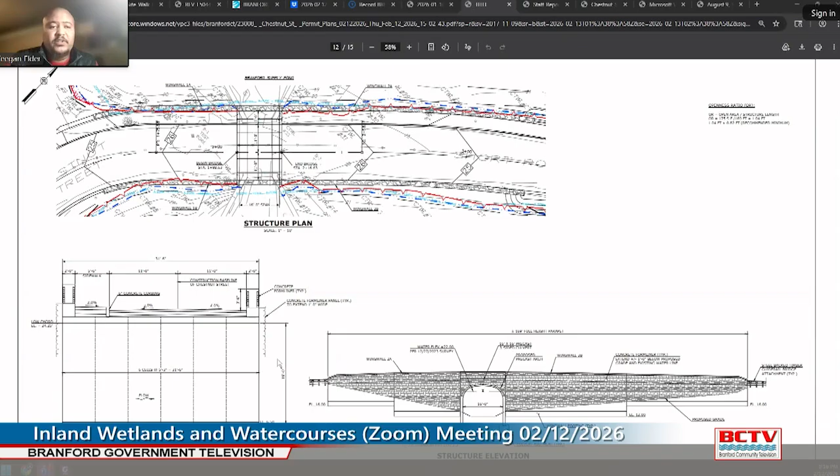That's great. Commissioner Begamon again. Under the suggested construction sequence, number 12, you talk about a guide rail, but I don't remember us talking about a guide rail. Yes, so there's guide rail being installed on all four corners of the bridge. That's a Connecticut DOT standard to protect the blunt ends of all four corners of the bridge. Maybe we did talk about that, maybe it just wasn't called a guardrail. Okay, so the guardrails are going at the ends where there will be new plantings also. Correct.

Okay, and then the last question is about sequence—when they're cutting down the vegetation on both sides of Chestnut Street where it goes over the ponds. It says it can be done mechanically, and that it has to be done before construction starts. I'm thinking about erosion control, and when the cofferdams and turbidity curtains are going in relative to cutting trees on the bank, because once they're cut there could be erosion. Yeah, so the erosion and sedimentation controls have to go in first before they start cutting.

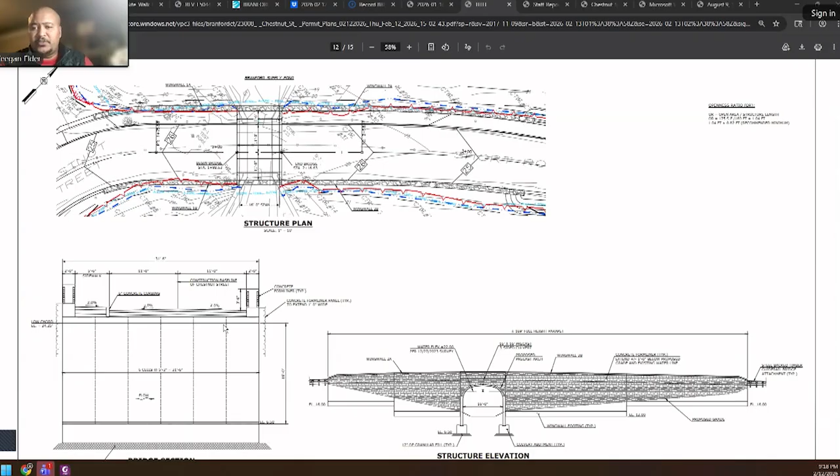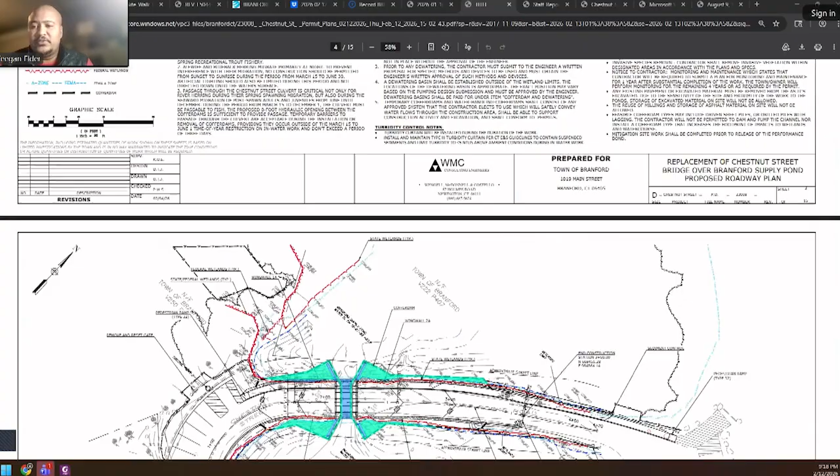The cofferdams cannot be installed until they cut the vegetation so they can reach over those areas to put the cofferdams in. Cofferdams underneath the bridge and within the existing bridge cannot be installed until they remove the top deck, because those cofferdams involve driven sheets or systems to keep the area watertight. So the sequence is: erosion and sedimentation controls, silt fence, installed first; then cutting; then they'll remove the deck; then install the cofferdams in the remaining portions with turbidity curtains, and continue construction beyond that. Okay, thank you.

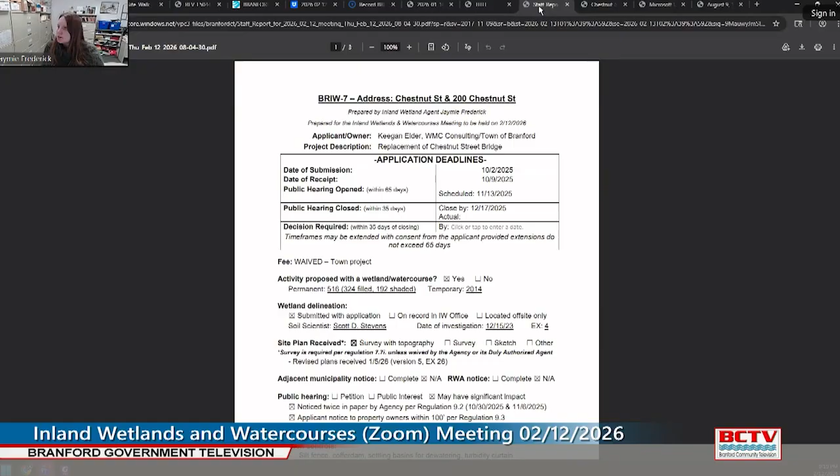This is a town project, so no application fee. We are at the end of our time clock—this is where we got our extensions for closing the public hearing, so the public hearing really can't be continued past tonight unless you want a special meeting. Permanent impacts are estimated at 516 square feet, with 324 feet being filled and 192 being shaded by the bridge deck, and temporary impacts of 2,014 square feet with associated grading activities. We received a soils report and revised plans, before today's plans, so we're up to version 6. I'd have to check the exhibit list to confirm the exhibit number, I can look that up if necessary.

We had public hearing notices. Erosion controls by and large consist of silt fence, cofferdams, settling basins for dewatering, and turbidity curtains. We received additional details on the turbidity curtain, and a revised note indicating no stockpiling of excavated materials on site. They are generally not proposing any stormwater changes or improvements, and are looking to mimic existing conditions with minor modifications relative to the walls of the new bridge.

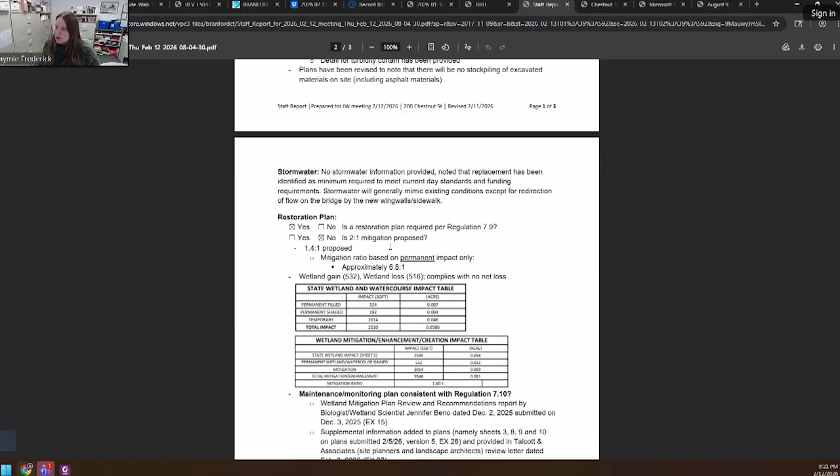A restoration plan is required under regulation 7.9. Regulations call for 2-to-1 mitigation, which cannot be reduced to less than 1-to-1. The applicant is requesting a reduction, proposing 1.4-to-1 mitigation.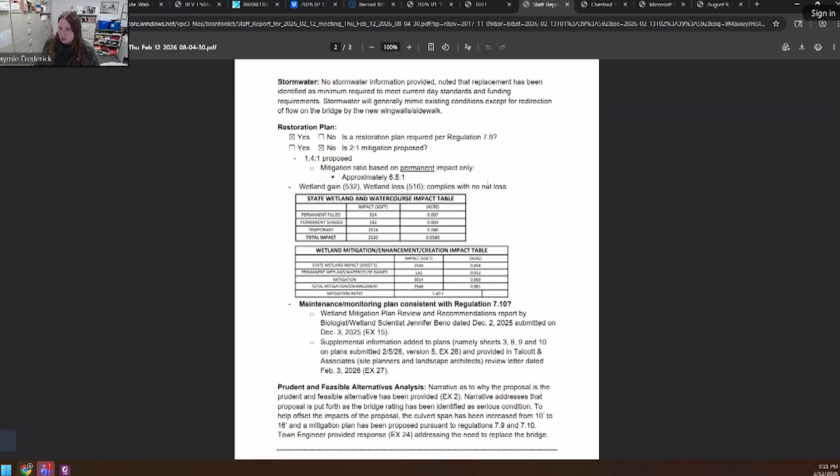I also calculated the ratio based on permanent impacts, which puts them at 6.8-to-1. And I specifically noted that wetland gain is 532 and loss is 516, so it complies with the commission's no net loss policy.

For the maintenance and monitoring plan, we have the wetland report, a follow-up report from Jennifer Beno regarding the proposed mitigation, supplemental information added to the plans addressing comments from commissioners and staff, and a review letter from Talcott and Associates, site planners and landscape architects.

The comment I wanted to raise is that this review letter, as we're interpreting it, applies specifically to the Phragmites area. They're saying this area shouldn't be planted until it's been managed for invasives, meaning it wouldn't be planted for 3 to 5 years, which is a bit different from what the commission has typically seen.

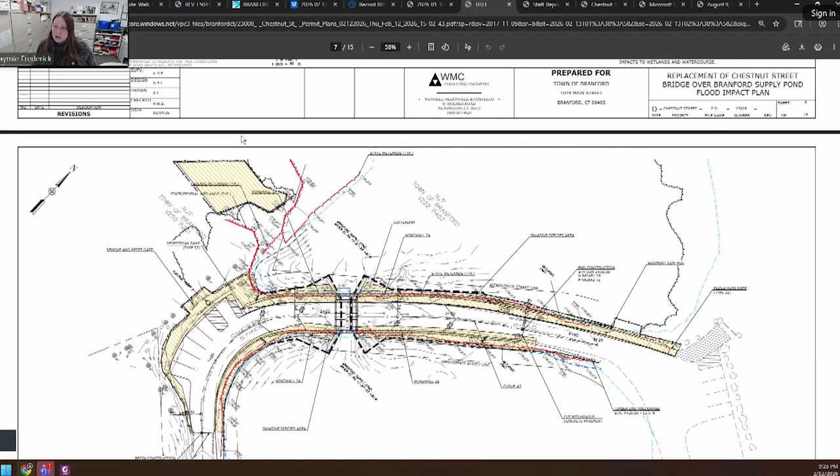Part of why I was asking how that would happen is that planting in a stand of Phragmites without excavating the soil is also something the commission hasn't typically seen, and I questioned how that would be feasible. Managing it for a slightly extended period before planting seems reasonable to me. I'd probably modify our standard monitoring language with that in mind, but I just wanted to point that out.

For the prudent and feasible alternative analysis, we have the narrative in Exhibit 2 outlining the considerations put forth and refuted as neither prudent nor feasible. We also have the email from the town engineer responding to the need to replace the bridge.

I did not come up with conditions for consideration. I usually don't do that on a public hearing until the commission has closed the public hearing and started the deliberation process, so I have a direction to take things in.

I also want to note that the commission did make a determination that this activity may have a significant impact. Under regulation 10.3, in the case of an application which received a public hearing pursuant to a finding by the agency that the proposed activity may have a significant impact on wetlands or watercourses, a permit shall not be issued unless the agency finds on the basis of the record that a feasible and prudent alternative to the proposed activity does not exist. In making this finding, the commission shall consider the facts and circumstances set forth in subsection 10.2. This finding and the reasons therefore shall be stated on the record in writing.

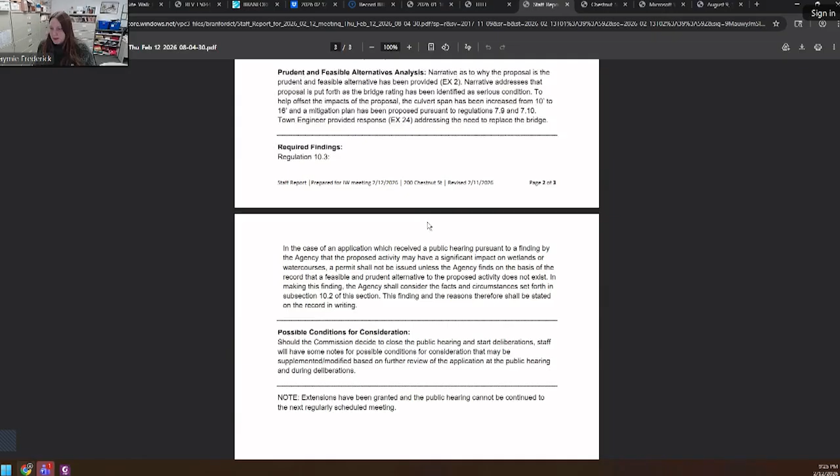So, any questions or comments from commissioners?

I guess I'll stick my chin out. This is Commissioner Bassermann. Given that this is before us because of safety concerns, I'm hard pressed to think of what an alternative safety solution would be. The manner in which the construction activity took place certainly has some variation to it, but the concept of needing to replace the bridge, I'm not seeing an alternative. So where do you draw the line on feasible and prudent with that background?

Jaymie Frederick, wetland agent: there's the consideration that there's an existing bridge, the existing traffic patterns, and the access to open space it helps provide. The town engineer also noted in his letter that if they discontinued the bridge, what would that look like? They're getting state funding to replace the bridge due to its safety condition, but I don't know that they'd get state funding to remove it, and I don't know what impacts that would have. Also, if they discontinued that through drive, they'd have to create a termini allowing maneuvering for regular and emergency vehicles at either end, which could result in impacts as well.

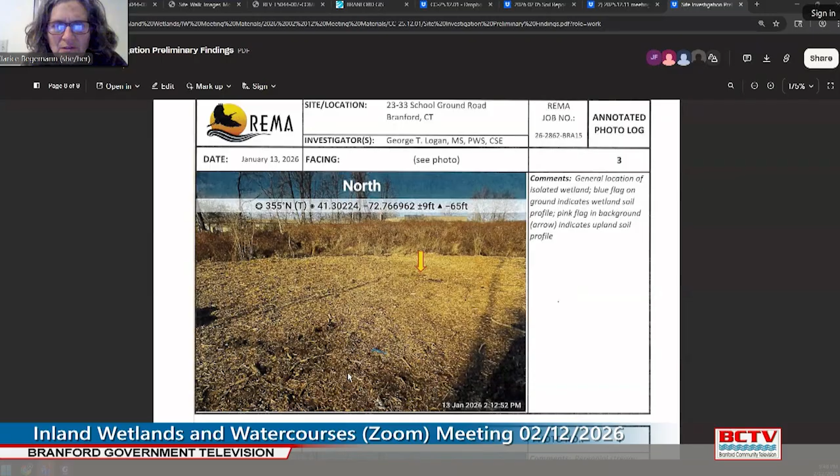Commissioner Begemann again, your thinking then is that to take away the fill that was put there would cause more damage than to leave it there and create new wetland, because creating new wetland is difficult? Well, not in my book, if I may say. I've had a fairly good success creating wetlands when one puts their mind to it, with good supervision and monitoring. The idea is the slope is stable, the soils that were put there were good for stabilization, and the erosion control blankets have been put in properly. I expect fully that when spring comes that will be fully vegetated.

So disturbing that slope might be risky, it might not be the best solution. Based on my estimations, because that's what they are, and I'm not going to claim to know exactly how much of this wetland has been filled, it probably didn't go more than 10 or 15 feet past, because I can see the slope on the LiDAR aerial photography, the pre-existing toe of slope extended about 10 to 15 feet on average.

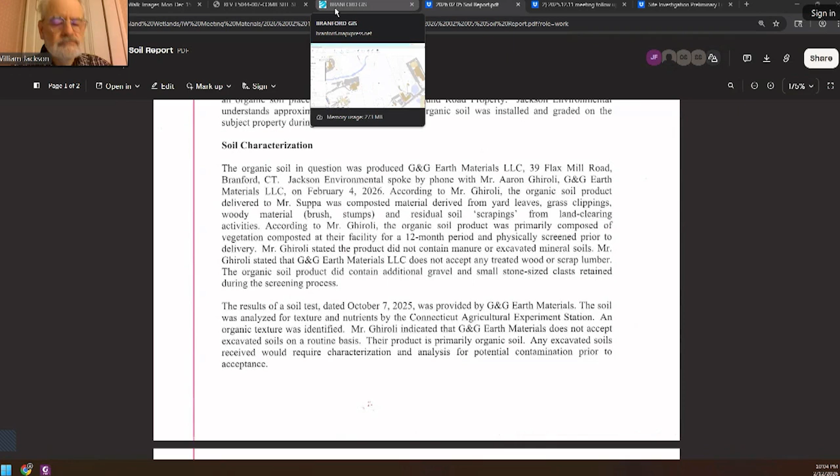This is Commissioner Bassermann. Jamie, when there's mitigation involved and material has to get brought in for purposes of making sure there's a good base for the plants to survive, we don't get any testing of that material that's brought in for mitigation purposes, do we?

Jaymie Frederick, inland wetland agent. Oftentimes the plans may call out that there be testing, but it doesn't state that the testing needs to be provided to the inland wetland office. I would say we have not been in the practice of receiving it, not to say it wouldn't be a bad thing to look at. But generally speaking, in those instances a wetland scientist should be overseeing everything and reviewing it, and honestly they're more qualified than I am to look at the soil samples and results.

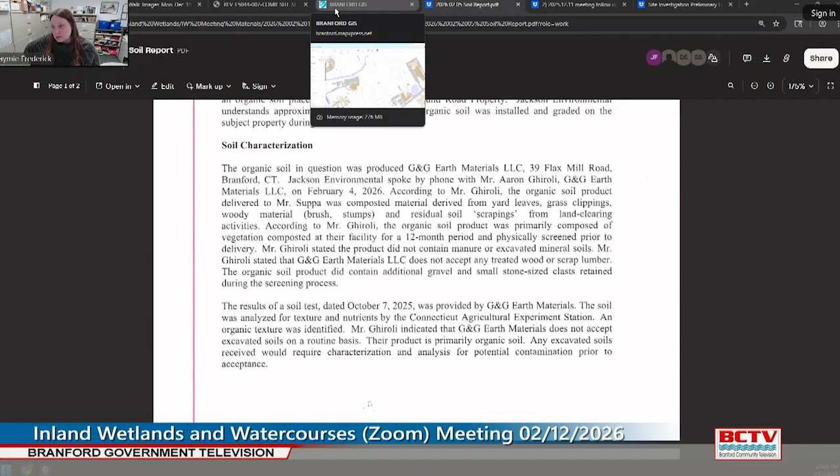So I think that kind of speaks to what Mr. Logan was saying earlier about oversight being key. Of course, there was no oversight on the placement of material on site already.

This is Commissioner Bassermann. Probably the best we can do in moving this thing to completion is the comment about maybe an affidavit from Mr. Ghiroli, so that we have something in the record that says, at least from a wetland standpoint, we did the appropriate due diligence in making sure that the material brought in was appropriate for what we were trying to do here.

Jaymie Frederick, inland wetland agent. I do want to note that the zoning wetland enforcement officer did want to raise a point regarding the pipe shown in George Logan's report. Heather, if you want to.

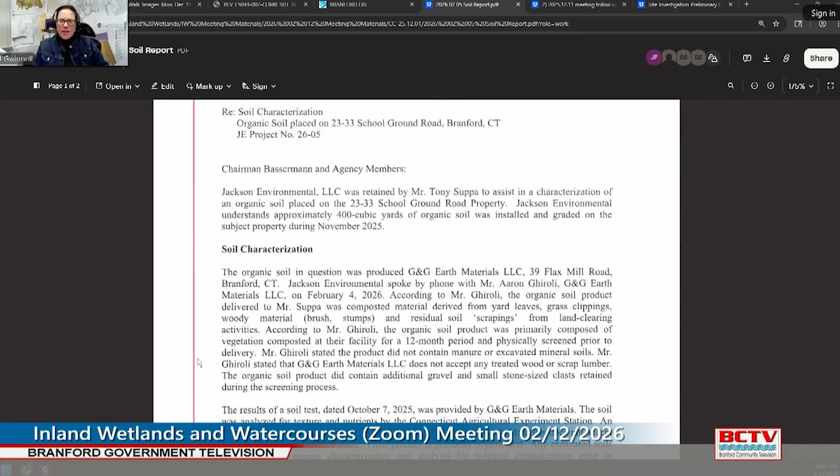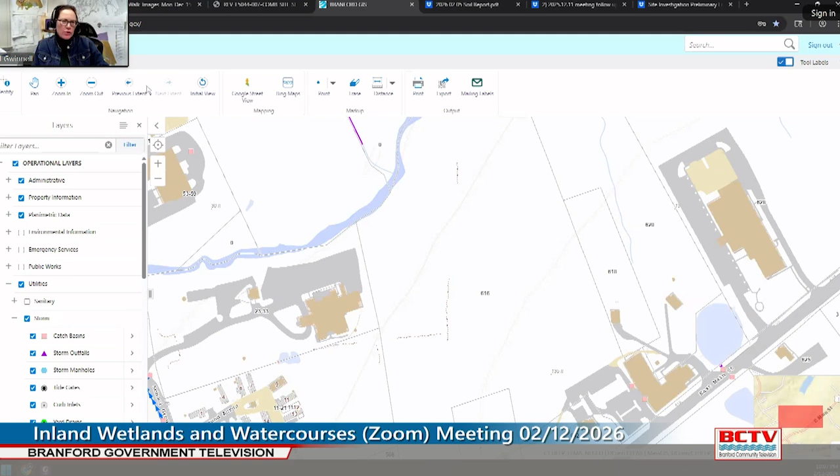Sorry, I was looking through some stuff on the screen. So the pipes, when I initially went out for my investigation, were not actually attached to anything. There were two pipes that were tossed to the side, not attached to anything. I don't know where they came from. There is another pipe on the far side of the property, at the driveway side, almost exactly kitty corner. That pipe leads into this area, because I believe water gathers up there from when it rains, sloping downhill. That pipe goes into where this fill is, but initially there was no pipe coming out.

Let's see if I can figure out how to share my screen and show you the picture I'm referring to. Okay, I don't actually know how to share my screen, because I don't usually have to. There should be a share button at the bottom of the screen. This is Attorney Leone again — push where you see the microphone and stop video, move to the middle, you'll see a little box with an arrow that says share. Good luck, you're going to see all the other weird stuff I have up. Let's see if I can get some of that down.

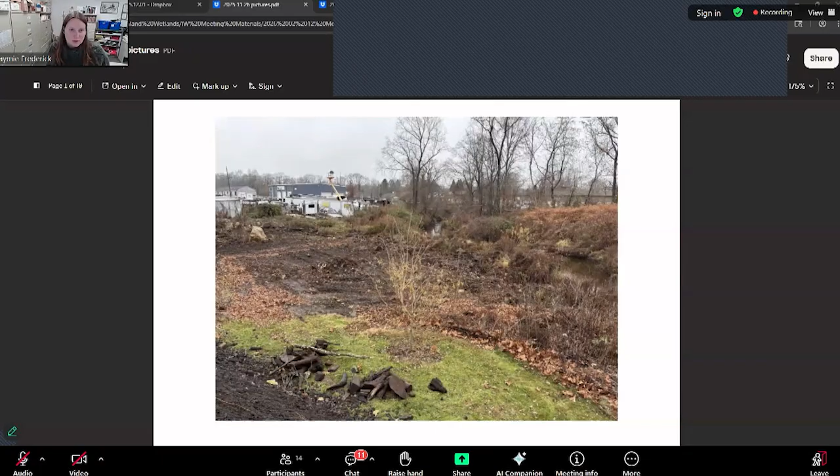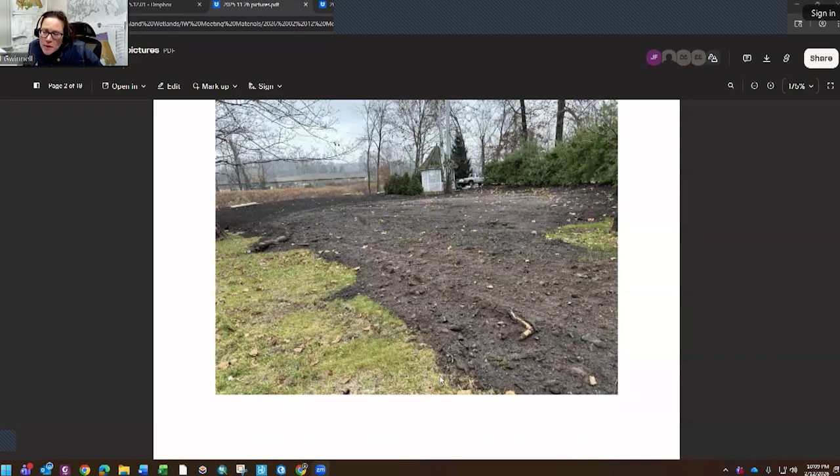Yeah, this is what I'm trying to share — can anybody see that? Are you trying to share your photos from your first site visit? I'm trying, it's just the one picture, specifically image 0522, but... Are you sharing from your Dropbox? Did you guys see it now? No, no. All right, I'll pull up the pictures and you tell me when we get to the right one. Okay, I can't even give you the number. Thank you, I'll have to practice the screen sharing for the future. So, no, actually here, I don't know if it's in those pictures — it should be off to the side.

So this is below, looking at the slope. I think the pipe shown in the pictures from George Logan's report is somewhere in this area, and you can see there's a pipe. I don't know that it's the same pipe, but there's a pipe, and in the next picture you can see there's a second pipe — two pipes. From the pictures, I can't see a pipe coming out from the fill, and I don't recall seeing one when we went out in December. At that point the erosion control blanket had been installed, so maybe it was behind the blanket. That picture you're seeing, I don't believe that was the day I went out there — I was not out there this day.

Yeah, those pipes were leaning up on the side, and the guys actually had moved them while I was there, just shuffling them around, not trying to move them one way or the other. They were leaning against a tree, and they ended up laying on the ground, but just coincidentally.

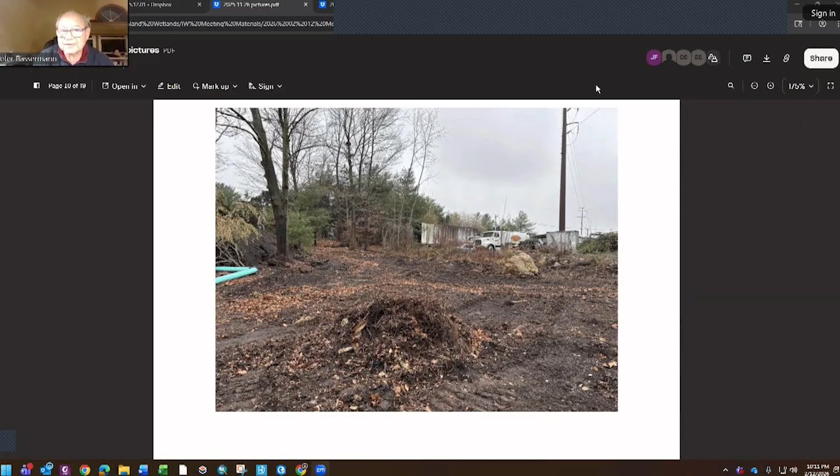All right, we're not going to make a decision tonight, other than decide when it's appropriate to reconvene or get an update and what that consists of. Jaymie Frederick, the wetland agent, we do have to continue the show cause hearing to a particular time. I would recommend we continue it to, let's say, March 12th.

Depending on what additional information we have, it'd be really nice if we can have at bare minimum a full wetland delineation of at least the wetland that's not under the slope, the fill material. That would be beneficial for consideration, along with an update on when an application will be submitted, and hopefully you're able to find a surveyor to help get that moving along.

Does that make sense? I'll start with the commissioners. Does that make sense to you? Works for me. Works for this one too, George Logan for the record. And I was going to say for the respondents, if it works for Mr. Logan, we'll make it work. All right, so we're going to continue the show cause hearing to March 12th.